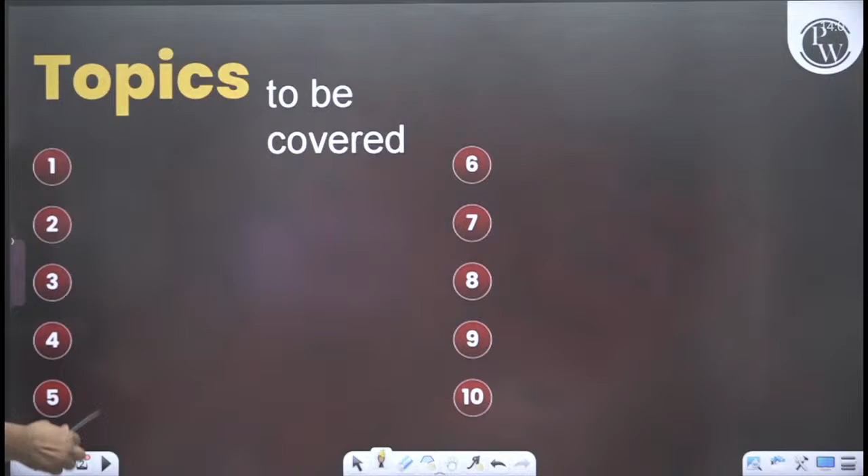In this revision through PYQs, what topics am I going to cover? First will be material science, as usual, because production we have divided between two faculties. First is material science. Then I am going to cover questions on jigs, then metrology, then forming.

I have selected PYQs based on their importance, not all PYQs. Whatever I felt that for GATE 2025, this sort of PYQ the student has to understand thoroughly.

How many hours? I don't know, to be frank with you. Let us say 2.5 hours. Focus on, because my Maha revision will be on the 10th. Again you will ask how many hours - I don't know, it may be 1 hour, 10 hours, or 7 hours. First of all, it's January, not even 1 month is left.

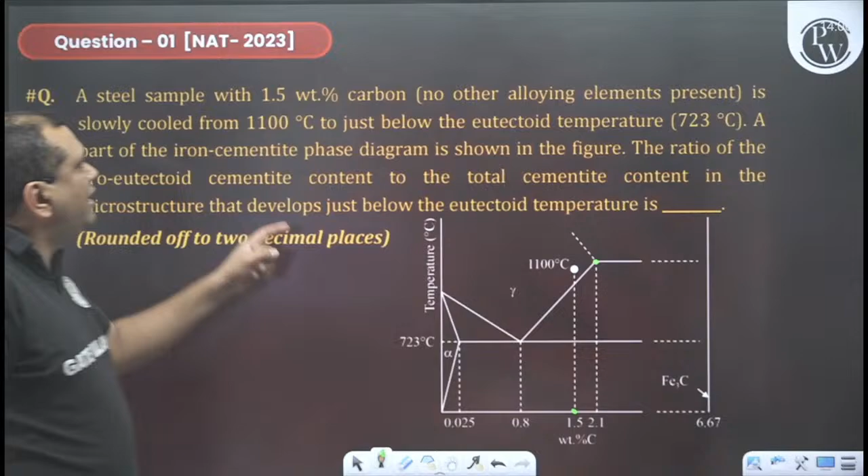A steel sample, this is NAT GATE 2023. A sample with 1.5% carbon - this is the iron carbon phase diagram, everybody knows about it. This is 2.1%, 0.8%, and the sample is having 1.5% carbon with no other alloying elements present. It is slowly cooled from 1100 degrees centigrade to just below the eutectoid temperature, 723 degrees centigrade. It is given that the eutectoid temperature is 723 degrees centigrade. A part of the iron cementite phase diagram is shown in the figure. This diagram is also called iron carbide, or iron carbon, or iron cementite - for one diagram, there are three names.

There are some PYQs here, Ritik Mac, some PYQs of P and I. Okay, the ratio of the pro-eutectoid cementite to the total cementite.

That ratio we need. Now, because we are in the hyper-eutectoid steel range, first tie line I will take it here. This is my fulcrum, this is my first tie line. And if I am taking tie line above 723 degrees centigrade,

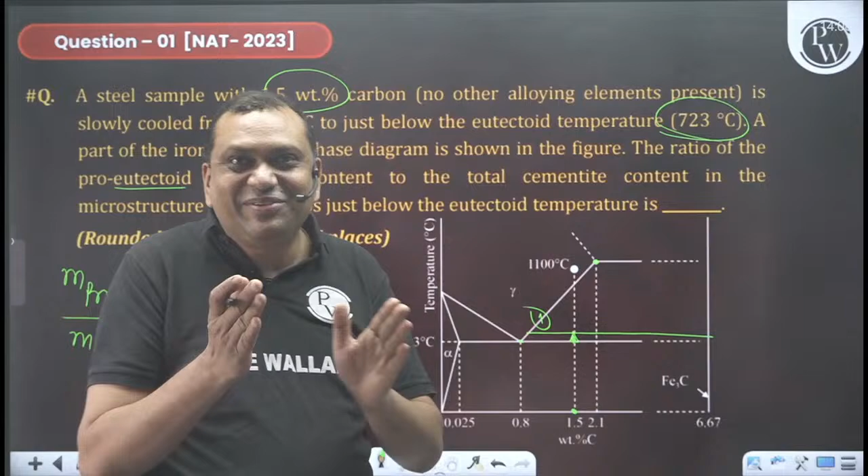I will get pro-eutectoid phase. Remember, pro-eutectoid phase accumulates at the grain boundary.

Brahmanandam, good afternoon. Brahmanandam, as I know, he has already completed 1000 films and he is preparing for GATE now.

Okay, all right. So my tie line one, gamma is this side and this side Fe3C. So what my lever rule says, I take opposite side. So if I want to calculate the mass fraction of pro-cementite, I will take opposite side.

I mean this divided by this. I want to calculate the mass fraction of pro-cementite. Pro means before eutectoid temperature. So opposite, this divided by the whole thing, meaning mass fraction of pro-cementite will be 1.5 minus 0.8 divided by 6.67 minus 0.8. That will be the mass fraction of it.

Yeah, very good. Himanshu Manvit, try to give me the answer. Just a minute, there is some issue in my front chat. Just a minute. Okay, now I'm able to see your chat here clearly.

So this answer comes out to be 0.119.

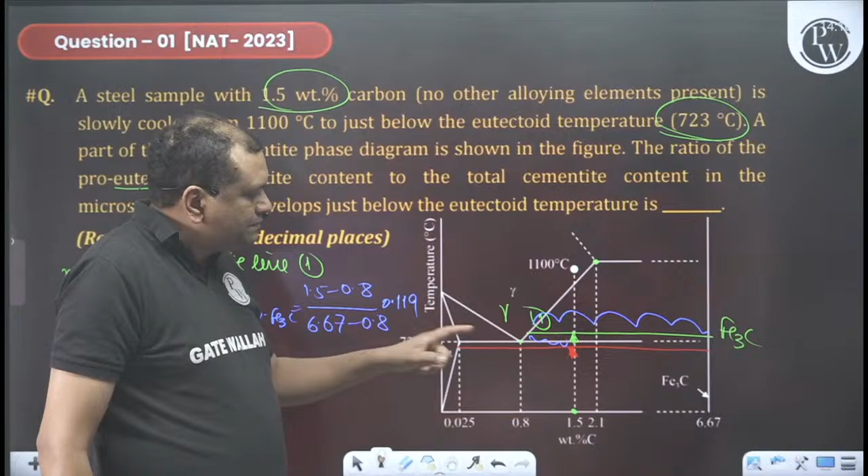So cementite is on this side. So this divided by the whole thing, meaning 1.5 minus 0.025 divided by 6.67 minus 0.025.

My dear students, whatever composition given in the phase diagram you have to take those compositions. This I taught you 0.02, but here it is given 0.025. This is 0.8 clear, this is 2.1, there is no issue.

So this comes out to be 0.220, and the ratio of mass fraction of pro cementite to total cementite means 0.119 divided by 0.220. This will come out to be 0.53.

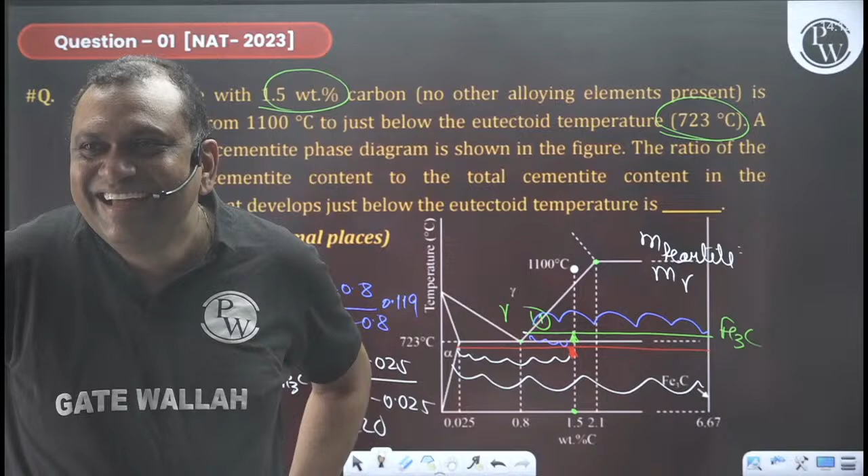Yeah, correct. Acha, Ayan, I know you, Ayan, I know you. This is clear or no?

Bacho, here a new funda to all of you. Everybody's okay. Now see the new funda. Cheers.

We have to understand the Latin little bit. Latin. Okay. So I am saying pro means before, hypo also means before, because sometimes gate people may play some word jugglery, so I'm warning you.

Okay, let us say this is your iron carbon phase diagram. Once again, this diagram is known by 3 names. Okati rendu mudu. First name is iron carbon phase diagram. Second is iron cementite phase diagram. Number 3, iron carbide phase diagram. All 3 are same.

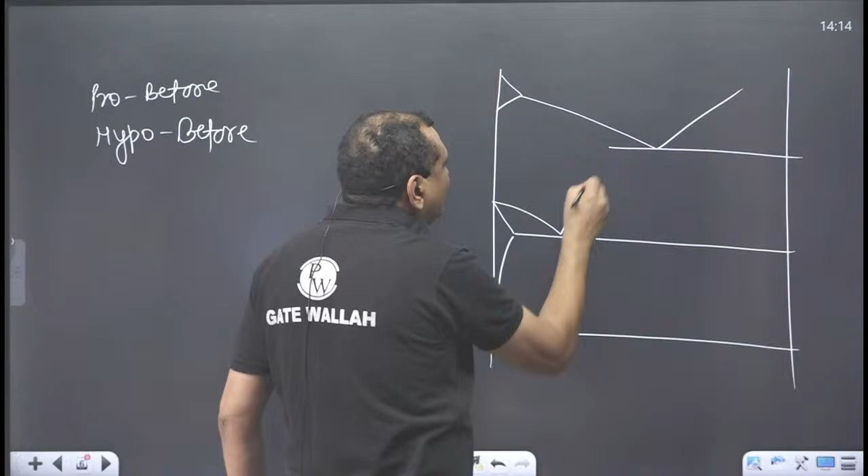Suppose the question is, in an alloy of cast iron, because beyond this point it is cast iron, I am giving you the variation you can expect in GATE. Let us say your cast iron composition is here, let us say 2.4%. This is 4.3%. This is, let us say, 5.2%. Let us say question says that in a sample of cast iron there is 2.4% carbon.

There is a 2.4% carbon. How much is the mass fraction of pro... how much is the mass fraction of, let us say 5.2%. It will be easy to understand. 5.2% carbon. How much is the mass fraction of eutectic cementite?

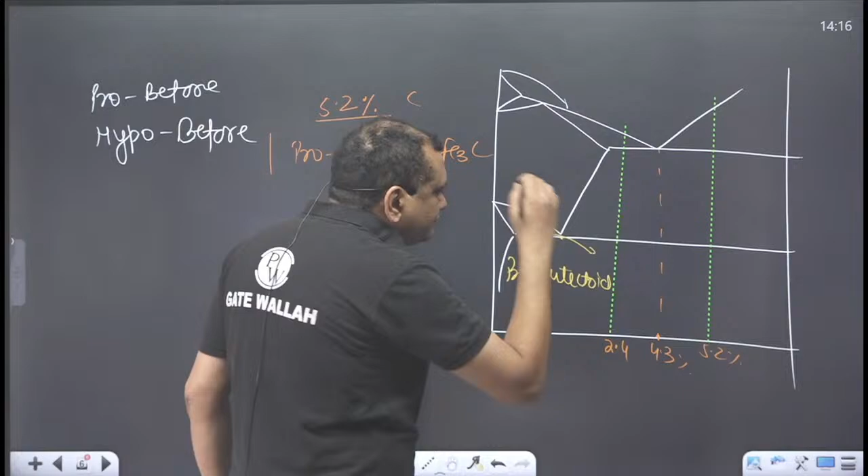See here, around this line, I use the word pro-eutectoid. And around this point, I will be using the word pro-eutectic cast iron, and this is steel.

I hope in GATE you have to have a presence of mind. Your questions are very easy. I'm challenging that if you have studied from PW and I have taught you there, whatever portion, every faculty's questions of GATE are pretty easy. You have to have presence of mind.

Now it says pro-eutectic cementite 5.2%. So take this tie line. Cementite is on this side. So the answer will be 5.2 minus 4.3 divided by 6.67 minus 4.3. That way we will handle it.

You have to have presence of mind. I'm guaranteeing you, I can write it and give it. Whatever we have taught at PW, 90% of questions you will be able to solve. Out of 100, 90 to 95% questions you will be able to hit. And on that you will get a rank.

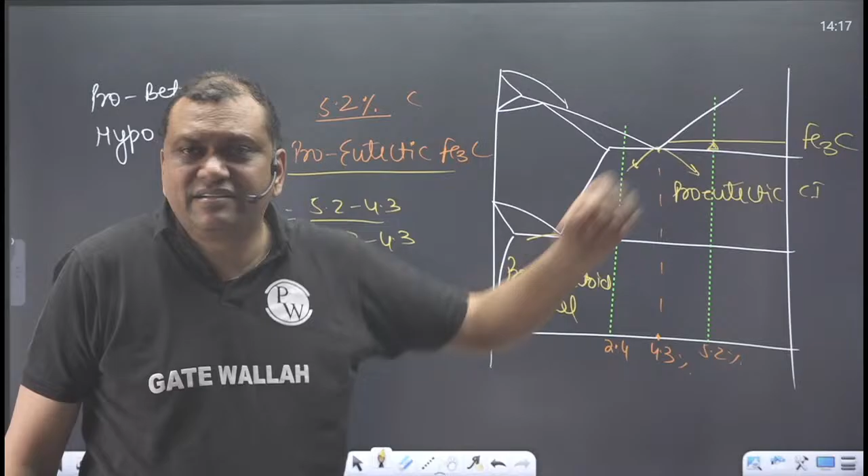You have to have presence of mind. Don't do mistakes. Correct? All right. Next question. Please read the next question.

Read the next question. Where is that? Oh, I was reading the question. It was a very good question, a very good question.

The other portion will be called pro-eutectic. Pro-eutectic austenite, pro-eutectic cementite.

I like this word. I like this word really.

In the iron carbon phase diagram, the eutectoid composition means 0.8. The maximum solubility is given. We know these things very well. 0.5 weight percent of carbon. The temperature is here, percentage carbon is here.

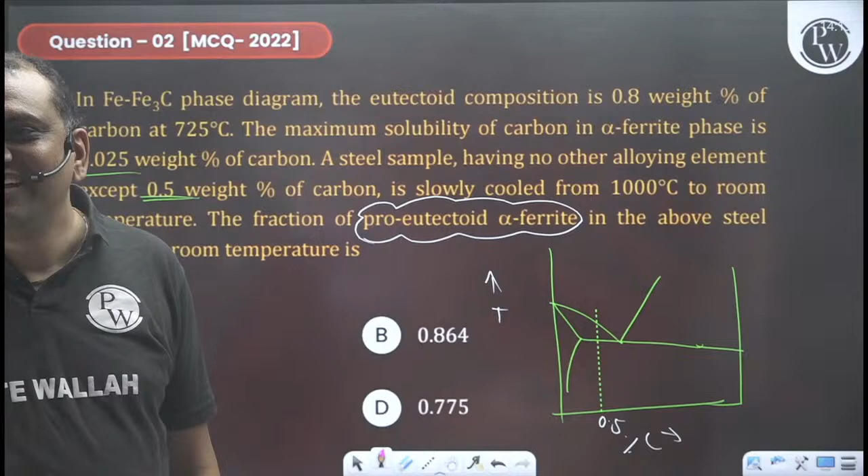I think all of you are really very good. Manvit, Vignesh, Chandru Patla, Shivang Verma, Prinshu Divakar, Ritik Mac. I'm joking with my students. Quite possible there may be some girl student, please don't get offended, I'm not able to recognize by name. Okay, very good, very good.

Verma, you know very well. Okay, very good, very good. Sister's name we should know, we should know the names of sisters. Okay, oh, sorry.

Alpha means this divided by the whole thing: 0.8 minus 0.5 divided by 0.8 minus 0.025, mass fraction of pro alpha.

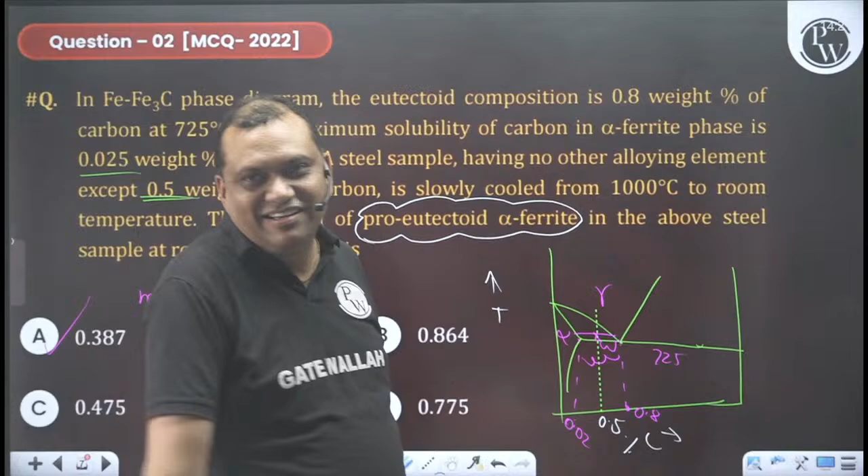Okay, okay, all right. So next Raksha Bandhan, Adarsh Kumar Verma is going. Is that all right, easy? Pretty easy? So Adarsh Verma, you are going? Very good, very good, I'll take the address and go with some gift. Brother gives gift to the sister. It's easy for our students. Very good, very good.

See about this: fluidity of a molten metal alloy during sand casting depends on its solidification range. Everybody knows, because in that zone there will be a range at which liquefaction and solidification takes place.

Okay, very good, very good. The phase diagram of a hypothetical binary alloy of component A and B is shown in the figure. This is 400 degrees centigrade, this is 700 degrees centigrade, this composition is 30%, this composition is 10%. All the lines in this phase diagram, including the solidus and liquidus lines, are straight lines. Why have they given straight lines?

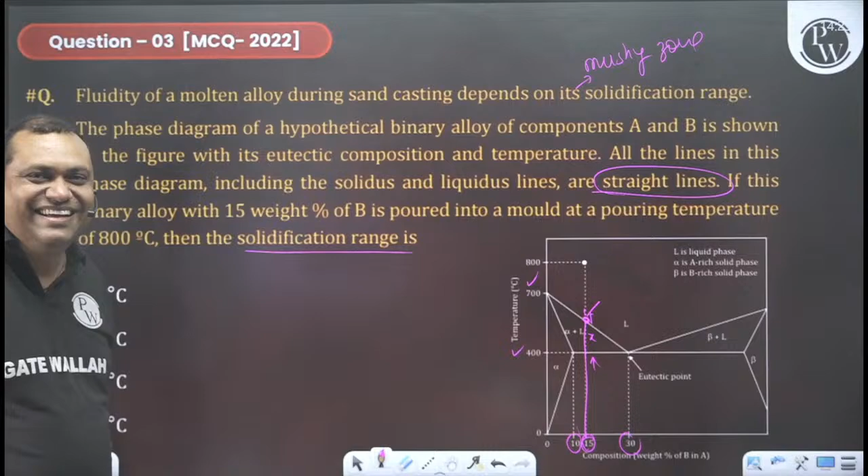So that you can do interpolation. Okay. If this binary alloy with 15 weight percent of B is poured into the mold at a pouring temperature of 800 degrees centigrade, then the solidification range is, what is this range? Some of you already told.

Basically, you can use similarity of triangles. One triangle is this: x divided by 30 minus 15. And the second triangle is this: 700 minus 400 is 300, divided by 30, because this is 30, this is 300.

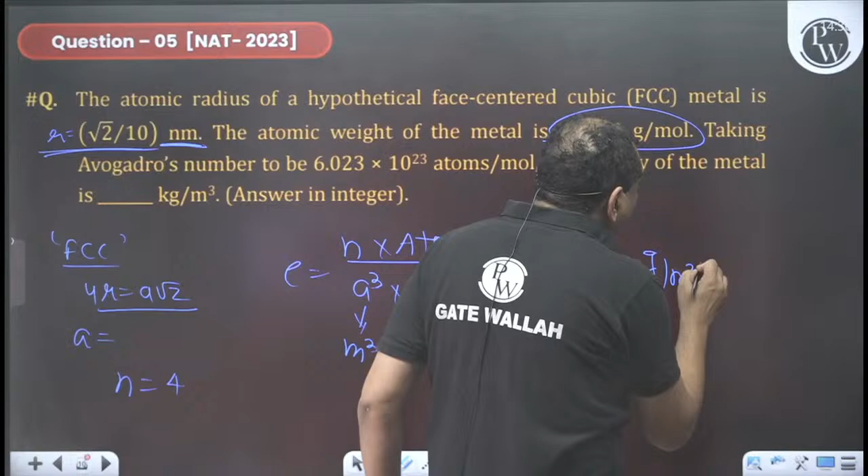Yeah. Yeah, Verma, that's the reason I'm telling you.

Okay, Shibang. Uranium 235 - oh, he's a bomb actually here. Uranium 235 is a bomb. Manvit, Ritvik, you are correct. 2500.

Uranium. Chandru. Aryan. Aryan. Very good, very good, very good. Brahmanandam, 10 is missing. Senior most hero for our gate preparation. Sumit Babu, Ram Ram. Omkar Roja, very good, very good. Dunia wale, very bad, very bad. Lavkush Kumar, very good, very good. Okay, okay. Mahesh, Babu Moshai, very good. R. Pant, Love Kush Kumar. Two people in one name, two people in one person. Love and Kush. Okay.

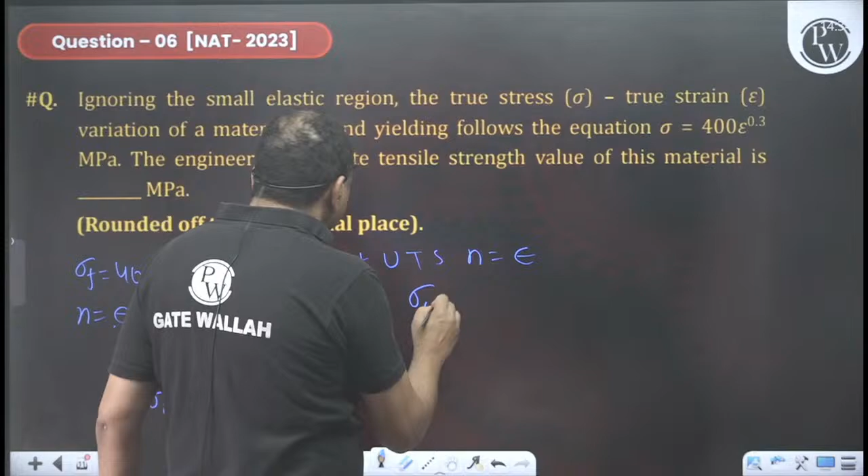So now n is equals to epsilon is equals to 0.3. So now epsilon is ln(e+1). So now 0.3, you take the antilog, you will get the value of e plus 1. And sigma f is equals to sigma naught times (e+1). And at UTS, n is equals to epsilon. So true stress is 400 times 0.3 raised to power 0.3. Correct?

You will get, this is the true stress, in MPa. And then with the true stress value, put it e plus 1 from here, calculate sigma naught. Very good, very good.

Some people are not answering correctly. Some people are not answering correctly.

Yeah, see, I'm talking differential Mahesh and all that. Acha, sorry, Ian, you are answering the true stress. Sigma naught value, yeah.

All of your preparation is really very good. Based on the response that I'm getting from the chat box, all of your preparation is going really very well, going really very well.

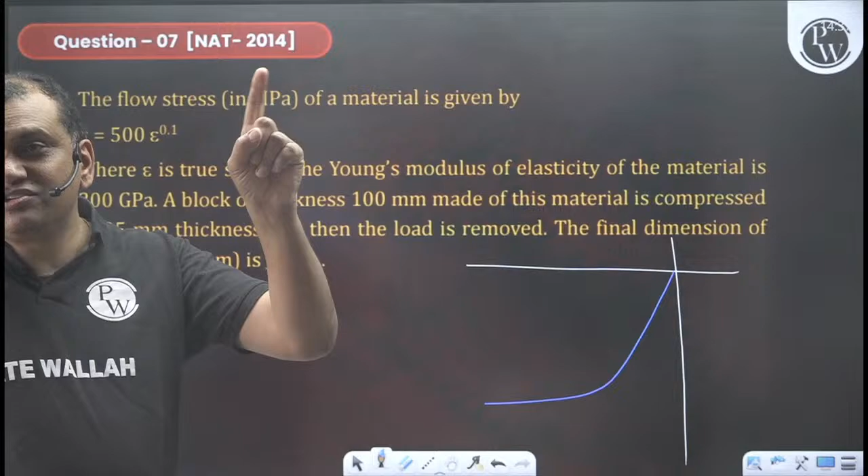Shivang Verma and Ritik Singh, on uranium-235, these answers are not fitting in the range given by IIT. Pant's answer is also not fitting in the range. That is the reason I am telling you, be careful - it is not fitting in the range, you check it. It was a very minor variation. Uranium-235, that answer is also not fitting. You have to be very careful.

Now, everybody should look at their screens for 2 minutes.

Uttari Sahazil, what are you doing? You have broken my heart.

Sahazil, what are you doing? Truth Lover short video. When the YouTube channel name is Truth Lover, it means you don't love truth.

Everybody should look at their screen. Please don't do mistakes here. Please do not do mistakes here. Leave everything, forget about everything, and look at me.

Most of you are answering this, no? Mechanical Rock Star, that answer is not in the range. Omkar Brahmanandam, I said correctly, no? Now it is in the range. No, up to 2 digits, 95.16 is in the range.

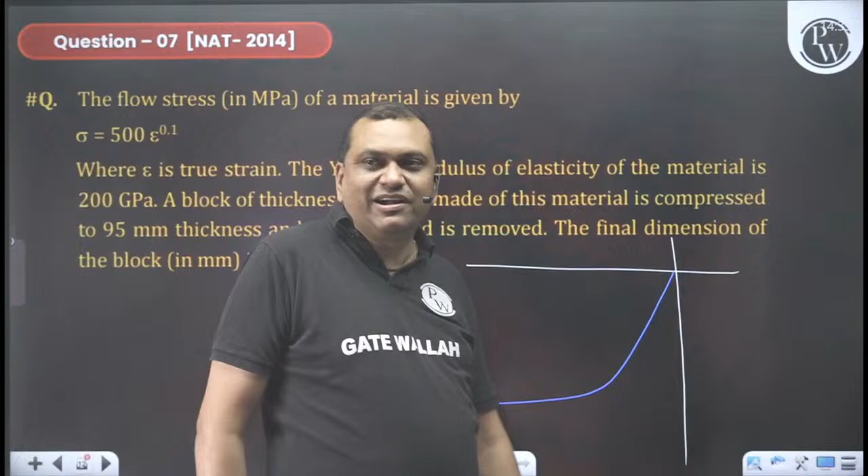See, look at your screen. Look at your screen. So this is the flow curve equation.

Two minutes, just please 2 minutes, everybody, without any deviation. Pant, I think, slightly managed to get in the range, but I don't think it is a correct answer. You see the answer given by IIT, it was a very narrow range, very narrow range.

Look at the screen for 2 minutes. See, there is a workpiece and I am forging it.

I am telling you the principle so that you can apply it in other questions as well. Height is h1, and you are forging it. You are forging it to, let us say, h2.

In this case, h2 is 95 mm. No, others, you are out of range. T Funny Mohan, you are out of range. Sumit Babu, you are in range. Bacho, I think you look at me now actually.

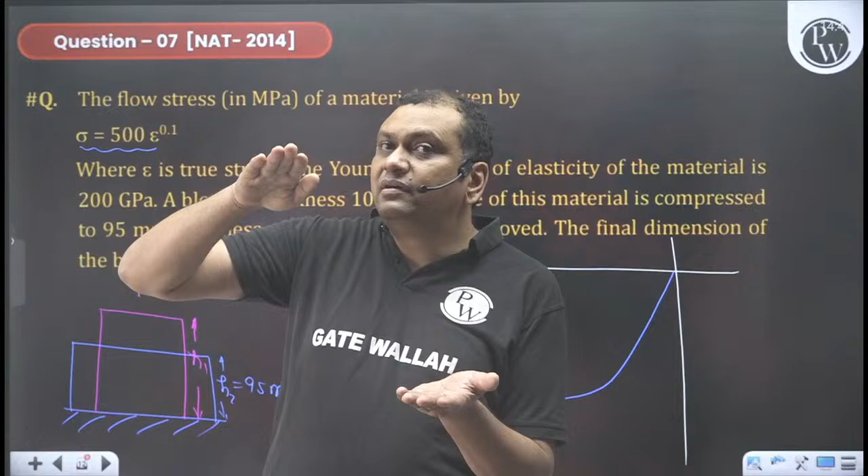Now look at me. The moment the hammer is removed, there will be elastic recovery. So you are applying the compressive load, so the size will slightly increase. Let us say this is delta H. This is delta H.

Suppose you are applying a tensile load. This problem we have done in Super 1500. This problem I have discussed in Super 1500. So my stress strain diagram will be in the first quadrant. So when I am unloading from here, this will be spring back.

So LF will be nothing but L2 minus delta L, because when I am applying the tensile load, the moment I remove the load, it will shrink a little bit. Okay, so here, now because it's a compressive load, the moment I remove the load, it will expand a little bit. That is the reason HF will be nothing but 95 plus delta H. But when there is tension, it will shrink a little bit. That question I have done in Super 1500, but still some of you have forgotten it.

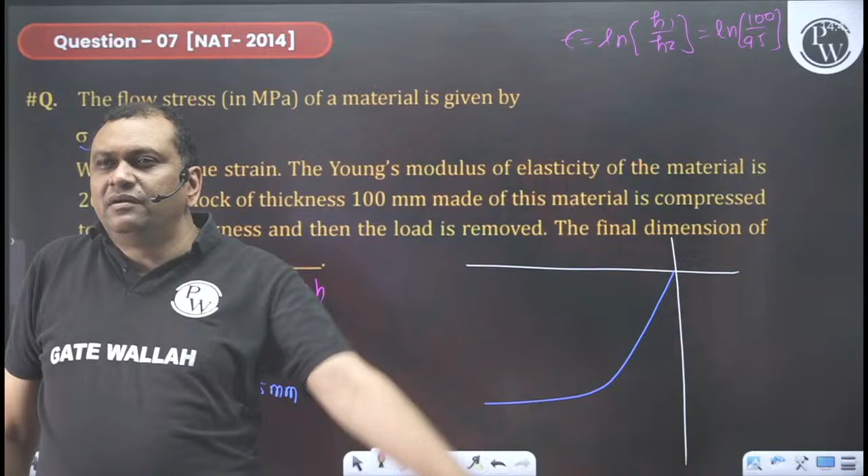Now calculate the strain: ln 100 by 95. Don't do anything, all of you are giving wrong answer. Love Kush Kumar, wrong answer. Funny Mohan, wrong answer. What are you doing, brother?

Mahesh, correct answer. Look at me, I am telling you, look at me. Again, because you are not hearing me, take a deep breath. By this, your head becomes cool.

So now at this point, there is some epsilon. Put the value of epsilon here, you will get sigma F, true stress. You will get the value of true stress. Okay, all right, no? Now, from that point, you are unloading it.

And this is called spring back. Because it's a straight line, I can apply Hooke's law here. See,

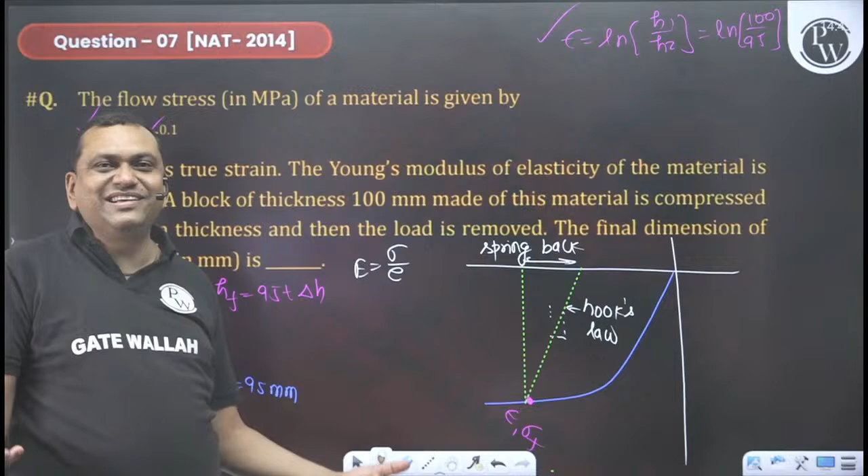What exactly are they doing? Whatever true stress they have calculated from here, they are putting it here. That is wrong. You have calculated true stress, but this is engineering stress. So sigma F is equal to, let us say, sigma 1.

E plus 1. How to calculate this E plus 1? You have got epsilon. From here you calculated epsilon. From that you calculate E plus 1. Put the value of E plus 1, calculate sigma 1. Put the value of sigma 1 here. Because you know E, sigma 1 you calculate from here.

This is a mistake all of you have made. Whatever true stress came out, you directly put it here. That is the reason your answer is not coming in the range. You see the IIT range, it is very, very narrow. Your answers will be wrong. It will not fit in that range.

So now this is not it. E is nothing but dH by 95, because this is the second elastic recovery, dH by 95. E you will get from here, E1. Calculate delta H, and HF is nothing but 95 plus delta H. And the answer comes out to be HF equals 95.167.

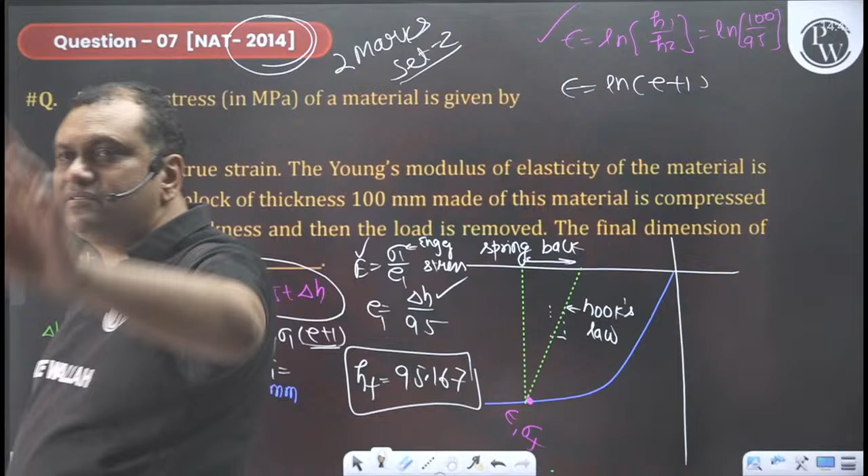Okay, I will repeat Manish Singh's. I will definitely repeat. Oh, NM Anurudh, I will definitely repeat, don't worry.

Let's do cheers first. Cheers with water. Cheers.

Such type of questions may appear this year also. See, once again, take a deep breath. When you are taking a deep breath, incoming air should go to your lungs, not your stomach, and then exhale gently. Cheers for water.

If you are applying the compressive load... no, it's not at all tough. Sumit Babu, no, it's not tough. Nothing is tough — if you know the funda, everything is easy.

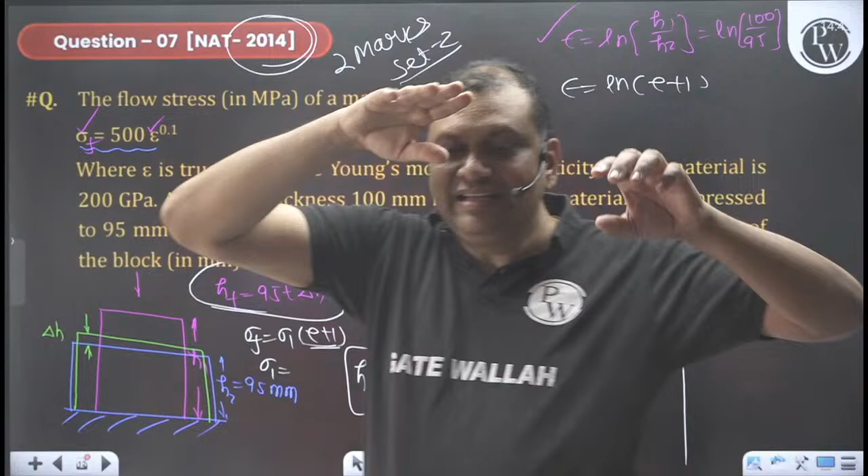If you are applying the compressive load, the moment you remove the load, size will increase because of elastic recovery. And if you are applying the tensile load, the moment you remove the load, it will shrink because of elastic recovery. So now, final length HF after elastic recovery is this. So HF will be 95 plus delta H. Delta H is the elastic recovery.

Okay, oh sorry, we have to speak everything in English here. Angrez — because it's a forging operation.

We calculate the true strain ln(H1/H2), that is ln(100/95). And epsilon is nothing but ln(e+1). So we know epsilon; take the antilog, so you will get the value of e+1. And we know epsilon — put the value of epsilon here, you will get the true stress. Means, what is the true stress at this point?

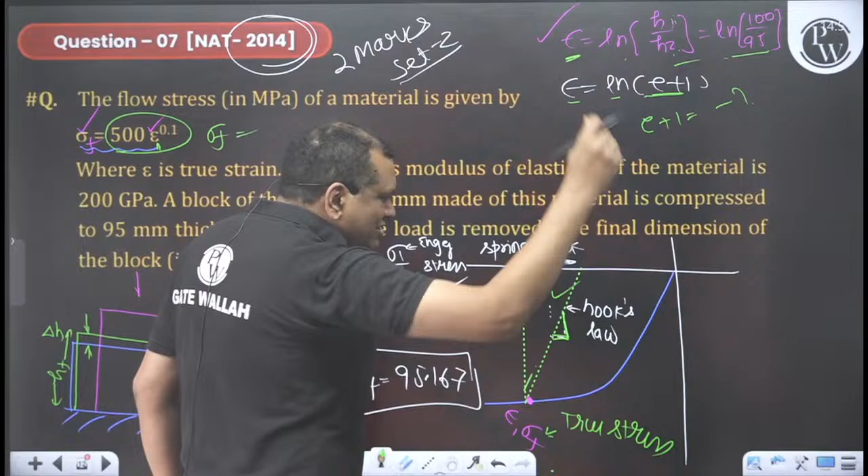Okay, now from this point I am unloading the specimen, and this is called elastic recovery. Because this is a straight line, we can apply Hooke's law here. Hooke's law means Young's modulus equals engineering stress divided by engineering strain.

The mistake most students make here is they put this true stress here — that is wrong. Hooke's law uses engineering stress, not true stress. You have got true stress; how to calculate engineering stress? Using this formula, which you know, you have to find this out. e+1 is here.

So you calculate the engineering stress. Now you know the engineering stress, and you know Young's modulus — it is given as 200, something like 200 GPa. You calculate e1. What is e1? This e1 is the engineering strain during elastic recovery. This e1 will be nothing but delta H by 95. So once we get the delta H value, we can find HF.

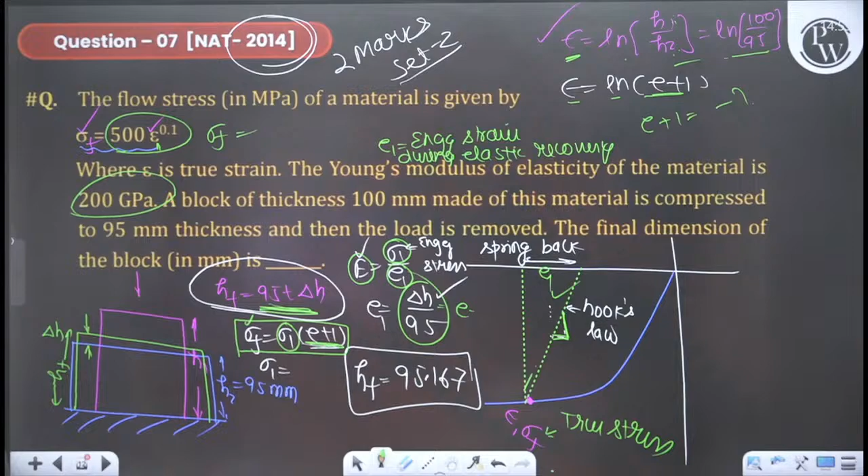Very good, Aryan. He has been trying basically for 3 months. Now the answer is matching. Once again, for such problems you have to be a little careful. Don't make mistakes — our entire year of preparation will go waste. Don't make mistakes; that's the reason to do a little pranayama, it will cool your mind. Very good, very good, very good.

What about this? On the Telegram channel, one student was asking, sir, when will I use this formula, because the K value is given? When will I use this formula? I have given the answer: when this formula is given in the problem, I will use it; otherwise I will not use it — I will use the slab method.

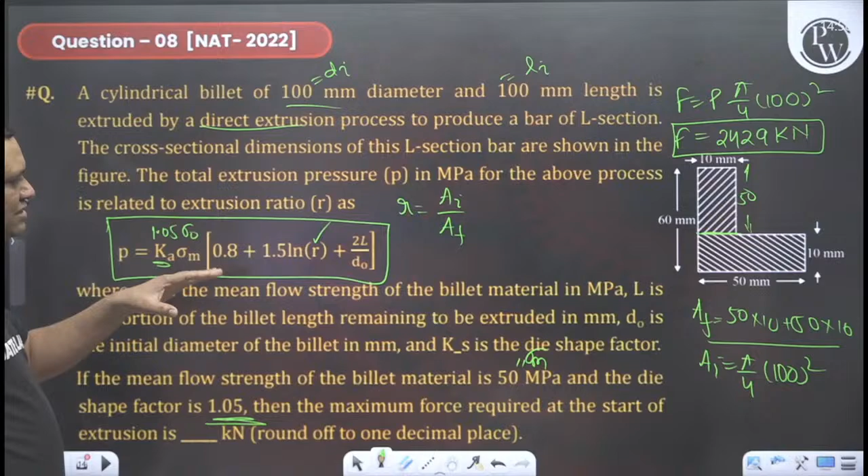Once again, responding to whatever a student was asking in the Telegram channel: if this formula is given, only then will I use it in the question. Otherwise, I will use the slab method.

Very good, Shahazil, Manmit, Mechanical Rock Star Samet, Adarsh, Saurabh, Chandru, Fani Mohan. What about others? They are showing only the show. What about others? Philophobic - this is a channel name, I think, eh?

Okay, good. GATE 2022. See this one.

Yeah, you are correct, Chandru. That is the reason I am discussing. Acha, random, I see. Ritik Mac, okay, very good. It's a rolling.

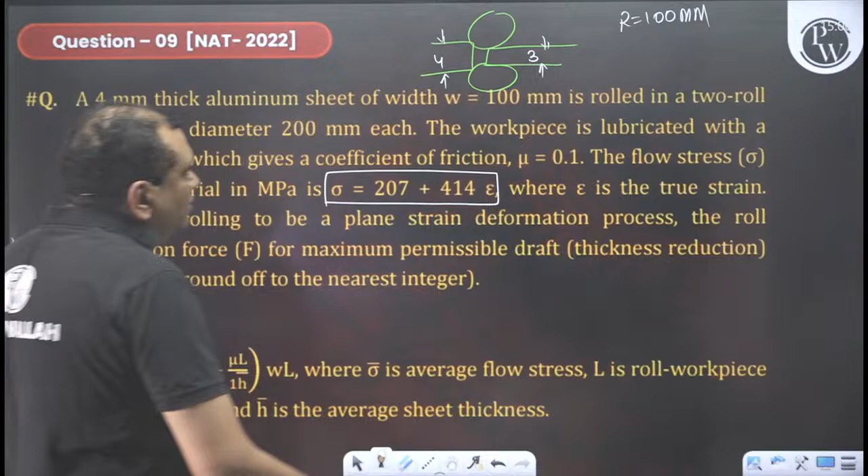Read the problem. Delta H is equals to mu square R. Mu is 0.1 square into 100. That's how we get it.

From here we will get H2 is equals to 3. Okay? We have to find out the force.

So sigma bar is nothing but 1 by epsilon 1 integral from 0 to epsilon 1 of sigma f d epsilon. That's what I told you to apply, this logic. And this epsilon 1 is nothing but ln of 4 divided by 3, initial divided by final. So this is epsilon 1, sigma f is here. So I will give you this answer.

0.287. So 1 by 0.287 integral from 0 to 0.287 of 207 plus 414 epsilon d epsilon. You will get sigma bar. Mu you know, L you know.

H bar is the average sheet thickness. 4 plus 3 divided by 2 is 3.5. You know mu, you know L, you know everything. Calculate F. Everything is given now.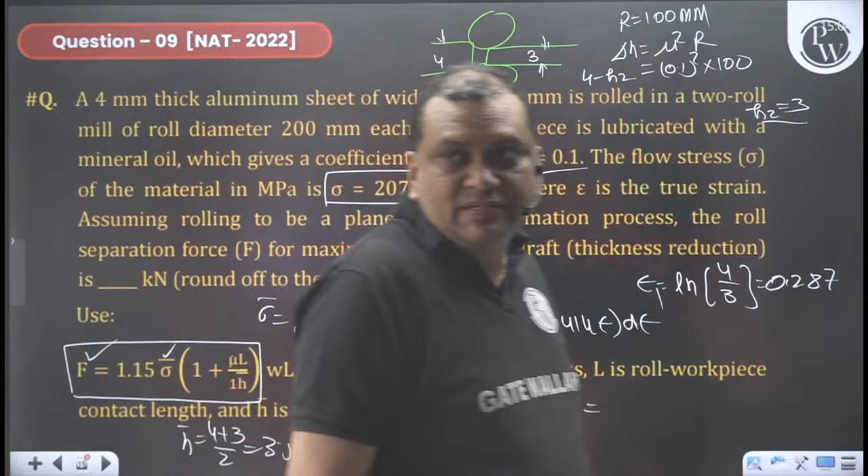Okay, good response, good response. Very good, very good.

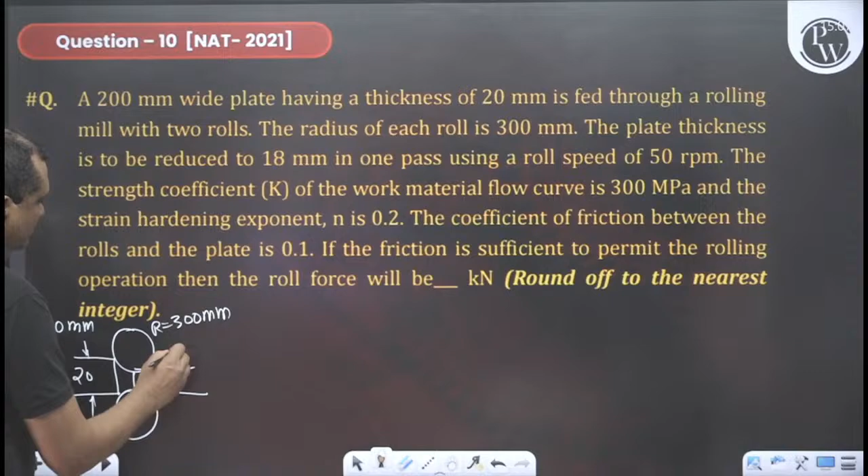A 200 millimeter wide plate having a thickness is fed through the rolling mill with two rolls. The radius of each roll is 300 mm. The plate thickness is to be reduced to 18 mm. Make the diagram, it will simplify the things. And the roll speed is 50 rpm.

The strength coefficient, the flow curve equation is given as 300 epsilon raised to power 0.2. Mu is 0.1. If the friction is sufficient to permit the rolling operation, then the roll force will be.

So F is nothing but sigma naught, W into L. T is nothing but F into L by 2. And power is nothing but 2T into omega for two rolls. Okay. L is equals to under root of R delta H.

And the sigma naught, R is given to you as 300, delta H is 2, R is given to you. So for calculating sigma naught, it is nothing but K epsilon raised to power n over n plus 1, and epsilon is nothing but ln of 20 by 18. You get epsilon, you know all these things. Sigma naught, W is given, L you can calculate from here, calculate the power.

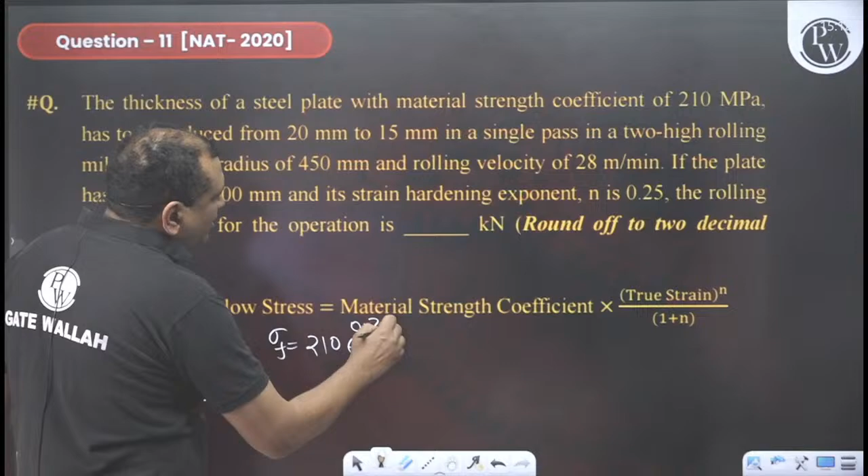Two students' response I can see in the chat box.

Okay, good. Verma, you made a mistake, I think, somewhere.

1167 kilonewton. Previously, you made a mistake.

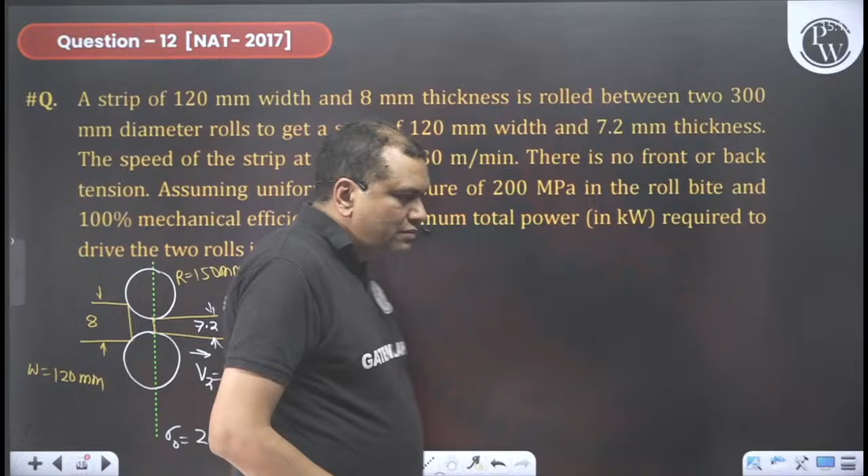No, Shahazil, no, that is not correct. So the problem is omega is 2 pi n by 60, and this n is RPM of rolls, RPM of roll. And the roll RPM was not given to you. So here you make an assumption.

Everybody should look at the board. Our neutral plane is exactly in the middle.

So V2 is known. Can I calculate V1 by continuity equation? V1 A1 equals V2 A2, continuity equation. So V1 into 8 into W1, and V2 is given as 30 meters per minute into 7.2 into W2. W1 equals W2. Calculate V1, you know V1 and V2.

So neutral plane velocity, let us say V1 plus V2 by 2. Here we have to make an assumption that neutral plane is exactly in the middle.

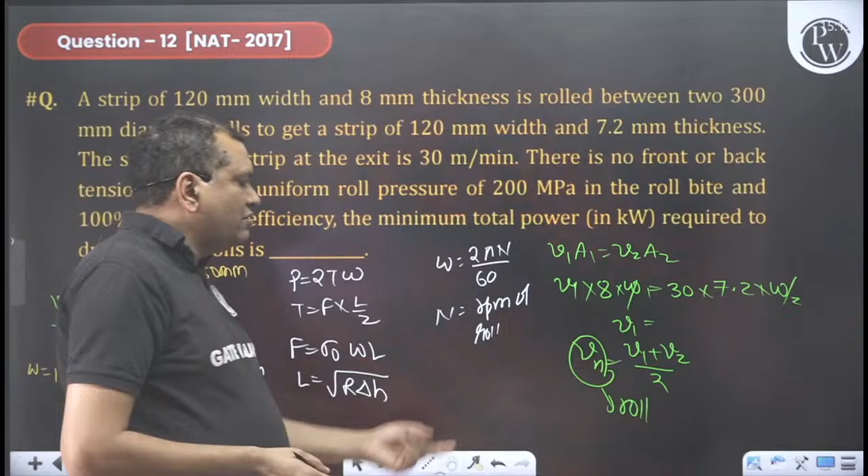So once you go, roll velocity is nothing but pi dn, and you put it here, you will get omega. Find out power.

No, Shahazil, no, that is not the answer. Shahazil, that is not the answer.

Yeah, uranium, you are correct. Because there are 2 rolls, so we are multiplying by 2. T into omega is power consumed by 1 roll only. We are multiplying by 2 because there are 2 rolls.

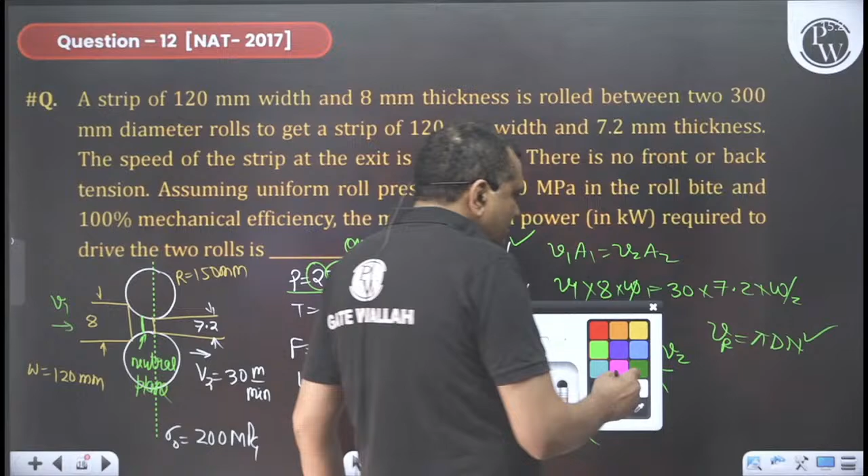Okay? Please remember the concept of this continuity equation. Continuity equation. Please remember this concept of continuity equation. Very, very important.

A range was, I think, less than 9.4, if I recall, if I can recall, something less than 9.4.

Now, one minute questions. These are very short questions. Answer should come out in 1 minute.

Remember that in punching, punch is exact. Clearance is provided over the die and shear will be over the punch. In the blanking operation, die is exact, clearance is over the punch. Punch will always be smaller than the die.

What Prabhu is telling? Sir, roll pressure means mean flow stress. Aryan, suppose this is the roll, okay?

If we see the friction hill, it will be like this. Friction hill will be like this. So in the rolling operation, we are making a lot of assumptions. Let us say this friction doesn't exist. Sigma naught, this is L. W is perpendicular to the plane of this board. So force becomes sigma naught WL. That's how it is, Prabhu is asking.

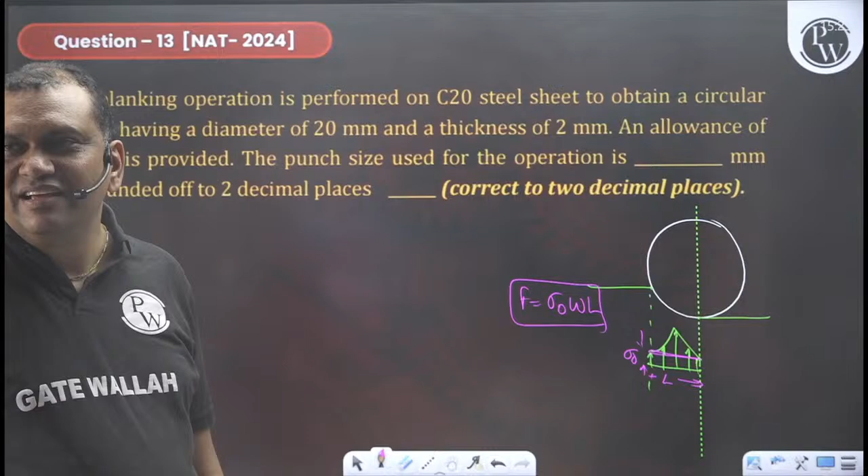Hey, hello, Evan D, Anand Shah, and Ritik Mac, what are you doing? And Rockstar, Mahesh, Babu Mosha, what are you doing?

Take a deep breath, hear what I am saying. Punching, punch is exact, clearance is over the die.

Reverse it. In blanking, die is exact, clearance is over the punch. Punch will be smaller than the die. Only then will the punch go inside the die, na? Punch should be smaller than the die, only then the punch will go inside the die. So now it's a blanking operation, so die will be 20 mm.

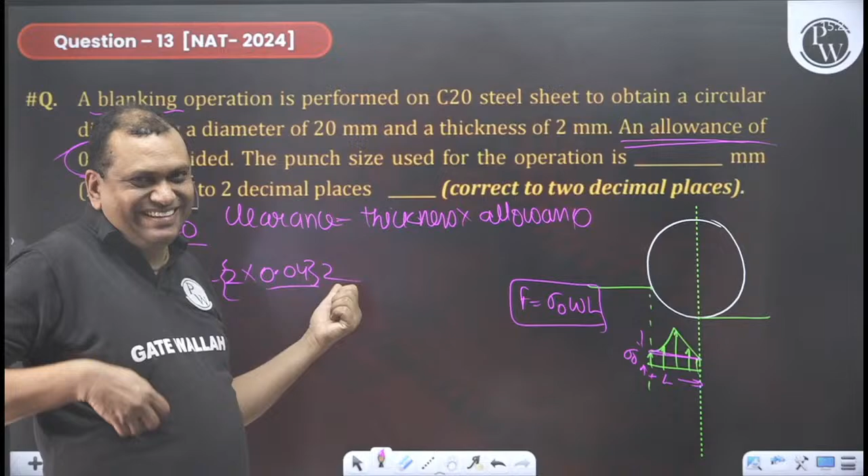So punch will be, now here, 20 minus 2 times. So what I told you, the allowance doesn't have any unit. It means 2 times clearance will be 2 times of this allowance, because it is not given whether it's a clearance allowance or diametral allowance. This allowance doesn't have any unit here. It means clearance will be thickness multiplied by allowance multiplied by 2. If it is a diametral allowance, I will not multiply it by 2. If it is a radial allowance, I will multiply it by 2. Correct? So that way you should do this.

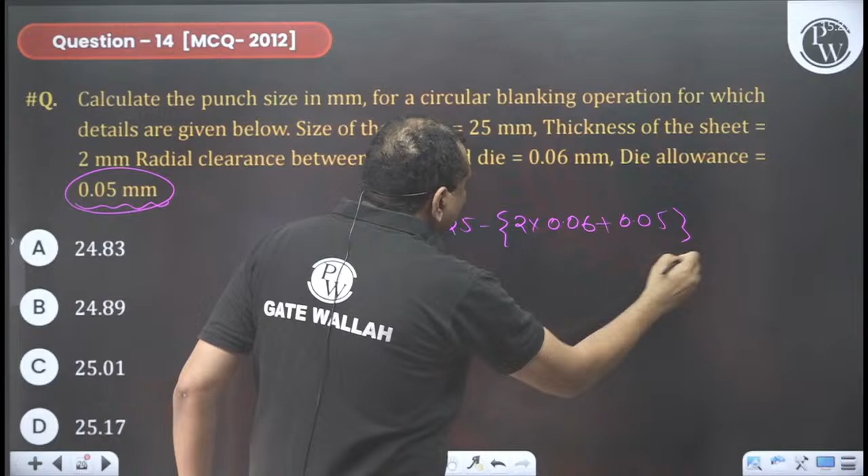So here allowance is having a unit. See, allowance is having a unit. So this we will add up in clearance. So here punch will be 25 minus radial clearance, given as 2 times 0.06, and here we will add allowance. So if the allowance is having a unit, I will operate like this. If the allowance is not having any unit, I will operate the way I did in the last problem. Everybody's okay? Once again I am repeating: if the allowance is having a unit, Anand Saab, you are doing a mistake. Anand, you are doing a mistake. Once again I am repeating, everybody should hear. If the allowance is having some unit, I will operate like this, I will add it along with the clearance. If the allowance is not having any unit, I will calculate the clearance by multiplying that allowance by 2 by sheet thickness.

Can you tell me in the chat box whether everybody is okay with that? Asif, Asit, Ankush, Sonsale - what are you doing? Giving the wrong answers. Everybody is okay? Yeah, very good. Please don't make mistakes here.

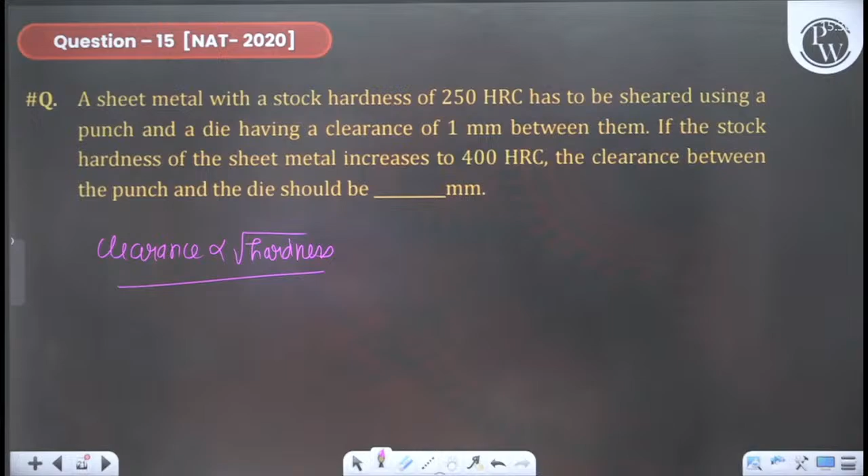Clearance is proportional to under root hardness. Clearance is proportional to under root hardness. Good, good, good, good.

Give me the answer of this. I hope you will give me the answer very quickly, within 1 minute. You will give me the answer of this question in 1 minute.

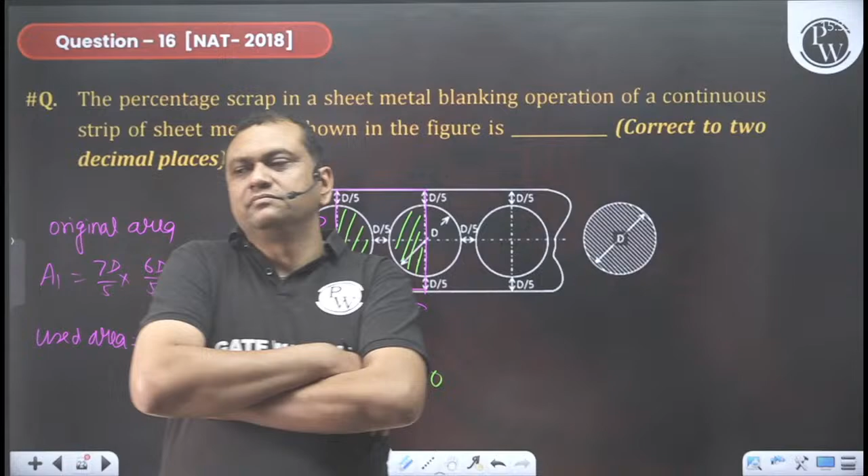Yeah, 53.25%. 53.25%. 53.25%. Good, very good, very good.

Can you give me the answer of this?

Process capability index means upper specification minus lower specification divided by 6 sigma. So here upper specification limit is 15.02, lower specification limit is 14.98. Standard deviation is this. See, answer is B.

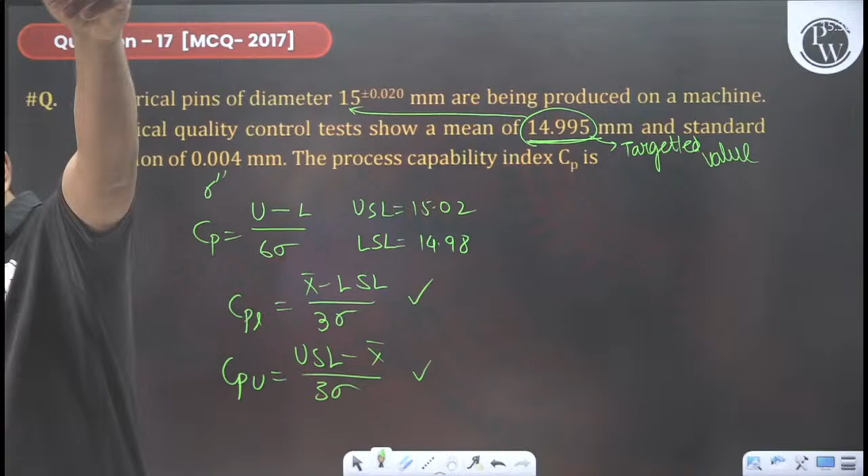You can say like this. Pandey ji, jhamajham. Very good.

What is it? There is something called process and something called specification.

What I will do now, in Maha revision, I will go little detail into it, because if we are doing PYQ, in Maha revision, we will have more time, 7 or 8 hours we will have. So for these boys, God is great. Who was asking actually? Yeah, uranium, yeah.

See, process means our machine. A specification is given by the consumer. This is given by consumer, and this is for machine. These are two different things. Correct?

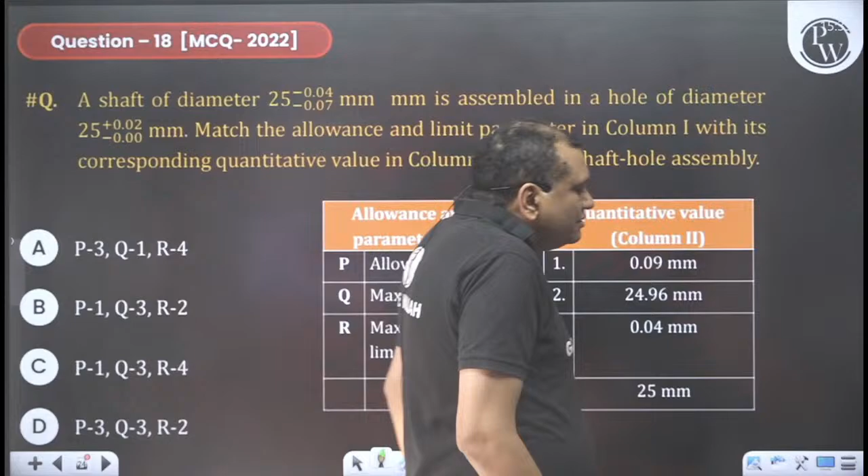Those who are having confusion in metrology, definitely they should attend revision classes. And in metrology, what I told you, you make the fit diagram. Before attempting any question, make the fit diagram.

Putrajaya and Rishabh Datta, Maha revision, definitely you should present. I will go little detail. Related to GATE 2025, I will go in detail. Don't worry, be happy.

And by the way, you may not know the details. I think it is around 2 hours drive from Kuala Lumpur, Putrajaya. And only Muslims are allowed to stay there, because liquor cannot be sold there. There are some rules and regulations for Putrajaya. Non-Muslims are not allowed, that's what my host told me, because liquor is banned. If somebody is found drinking liquor in that capital, he will be jailed. Anyway.

Okay. So 25 is the basic size. This is the shaft, and this is the hole. So this is the hole, 0.02, and this is shaft, 0.04 and 0.03. Correct? This is called fit diagram.

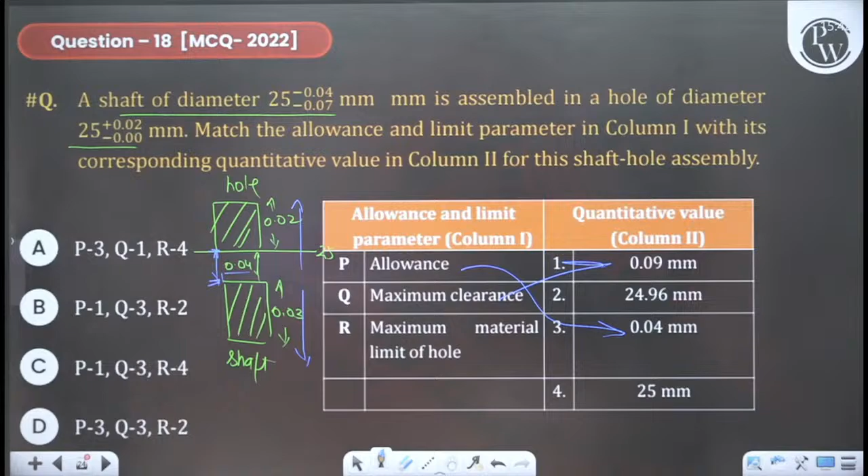Very strict discipline. So now, different color. This is the maximum material limit of shaft, maximum material limit of hole. So the allowance is 0.04. This is the allowance. Maximum clearance is this, 0.07 plus 0.02. Maximum material limit of hole is 25. Correct? So R4 Q1 P3.

Correct? Akash Khotar Rathi, and elimination we can do it. But such problems, always draw fit diagram. This is called fit diagram. While solving limits, fits and tolerance questions, always draw fit diagram. Okay, very good, very good, very good. This one.

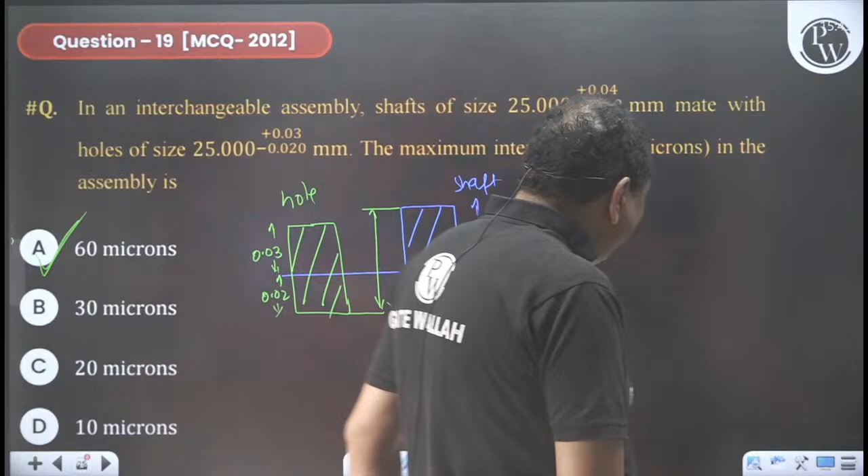Sharma, what is the full name? Sharma, I think you are our student. Sharma, what is the name? Correct? Ayyo, Sharma.

This one. Everybody will use their head. What is the answer? You don't have to solve this problem. Just see the option and you will get the answer. Don't solve this, don't solve this. Arey Tushar, what you are doing? Use your brain, use your brain.

Every year, 2-3 such problems will appear in GATE. You don't have to solve them fully. Just by looking at the options, you will hit the correct answer.

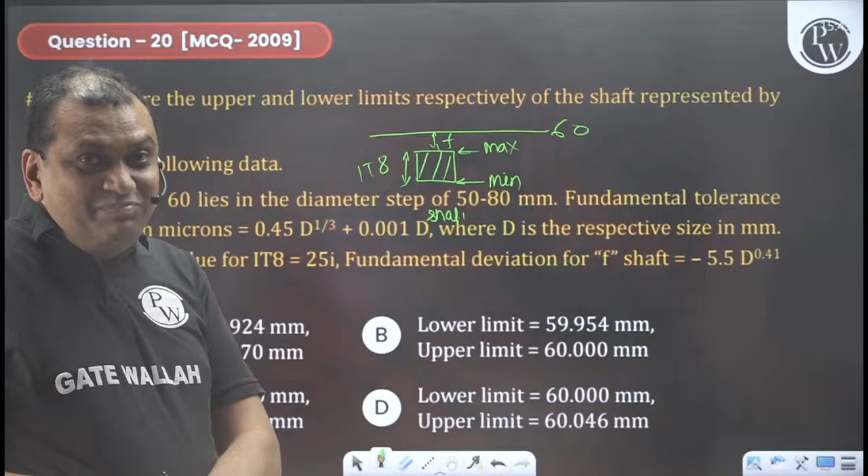Thanks, Rishabh Datta. But now it's time to crack GATE with a very good rank. Then both of our efforts will be successful - my effort and your effort will be successful if you get good marks in GATE. Okay? Please remember the trick, you can apply it in all subjects. In GATE, if it appears that the calculation is long, you see the options - by the process of elimination, you will arrive at the answer. Okay, very good, very good.

I am expecting one similar question like this. This is 25 plus 0.01 plus 0.02 and it is electroplated. This is millimeter, na? 2 plus minus 0.005. So this side also will be 2 plus minus 0.005, because the overall diameter is a sink, this overall diameter will be a sink. So convert this also into equally bilateral because it will be easy for us.

25, 0.01 and 0.01. So shift it. Basic size, this is 0.015 and this will be 0.005. So 25, 0.015 plus minus 0.005, correct na? So the overall D, what is the basic size? Basic size is this plus this plus this, 29.015, and the tolerance is 0.005 plus 0.005 plus 0.005 means 0.015. So D is nothing but 29.015 plus minus 0.015.

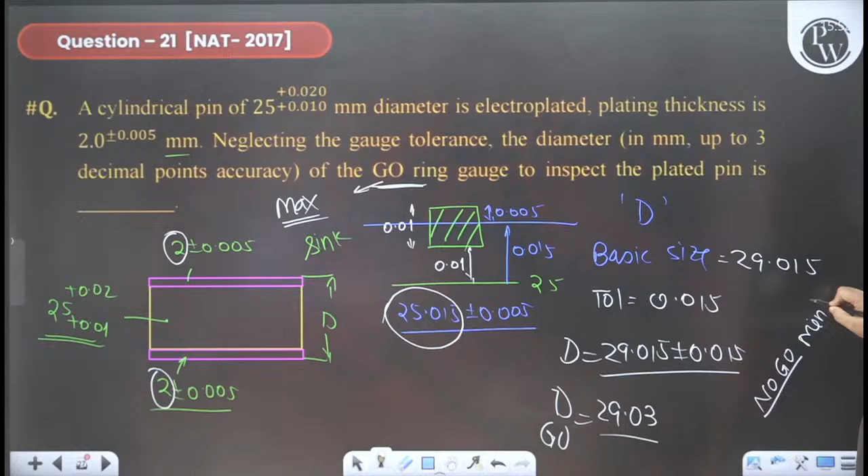Now you have to find out the GO gauge, and GO gauge is the maximum material limit, and the maximum material limit - GO gauge will be 29.03. Yeah very good, all of you are doing good. No, Sayyid, Rafi, Saeed - that will be the no-go gauge. Go gauge, and the no-go gauge will be the minimum material limit, and that will be 29. Don't do mistakes here, I am expecting one question on this.

Okay, everybody's okay? Everybody. I hope everybody's okay.

There was a demand from a student. So one question I did in Super 1500, and the same question I'm doing it here now, this one. It's a huge demand from students because it's very confusing. This question appeared in PI, GATE PI. It's a PYQ of PI. So there should not be any confusion on this.

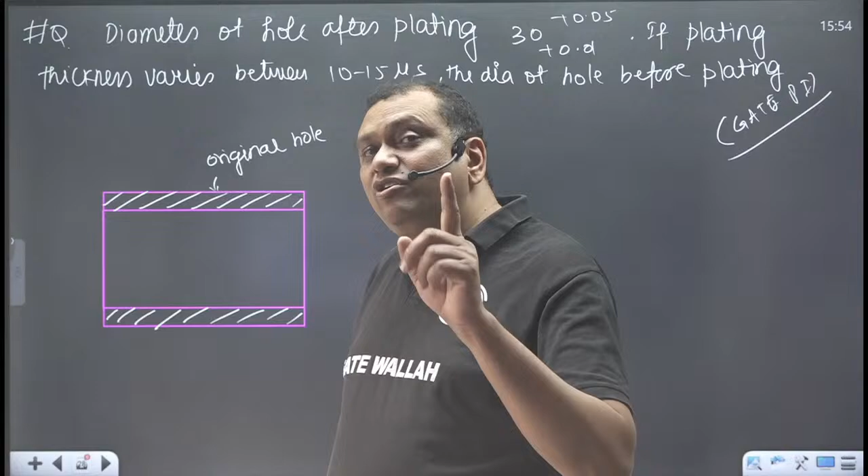So the question is, there is a hole. This is your original hole. Now, here I am doing electroplating from inside. This is electroplating.

After electroplating, this D1, D is 30 plus 0.01 plus 0.05. Yeah Mishra, you are correct. And plating thickness varies between 10 to 15 microns, so 10 to 15 microns here and 10 to 15 microns here. These are microns, and this is millimeter.

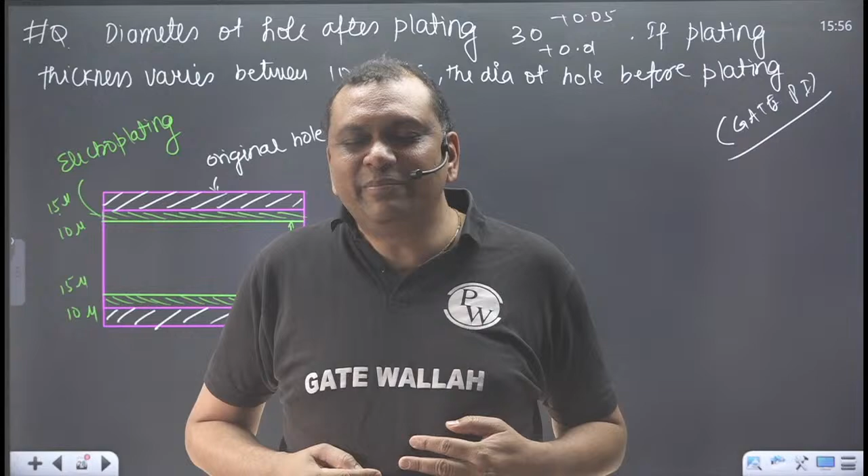So you have to find out the tolerance. No, Ashok, others, no. No. You do one thing - take a deep breath, this method actually works. I'm telling you, all of you, na, take a deep breath. This method actually works, you try.

This problem can be solved by two methods. This is the sink, na? This is the sink. You do one thing - for 1 minute, please don't do anything, only look at your screen. Don't do anything, only look at your screen. Please don't do anything. This is the sink.

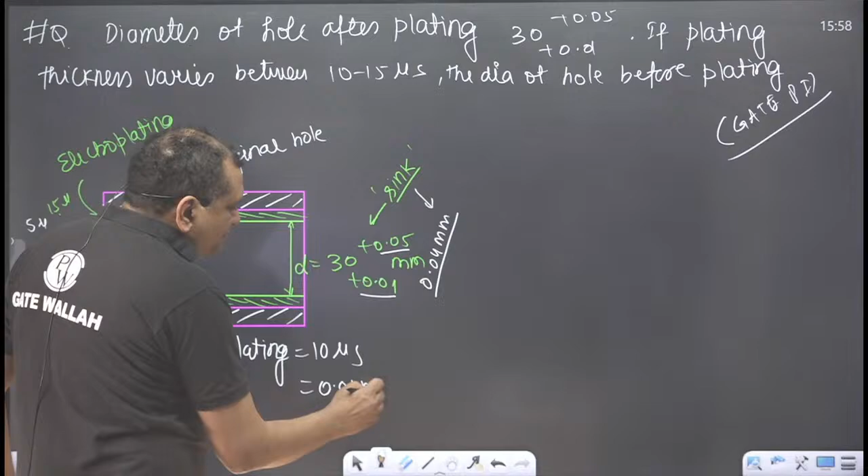Width of tolerance zone of sink is 0.05 minus 0.01, that is 0.04 mm is the width of tolerance of sink. Now plating, this variation is 5 microns, this variation is 5 microns. So total tolerance of plating is 10 microns, na? 5 this side, 5 this side, meaning 0.01 mm. Width of tolerance of sink is 0.04 mm.

Plating is 0.01 mm. So original hole will have tolerance of 0.04 minus 0.01, 0.03 mm, because tolerance always adds up. Tolerance always adds up. And fortunately, there was only one option where width of tolerance zone was 0.03. So hit it, that is the correct answer.

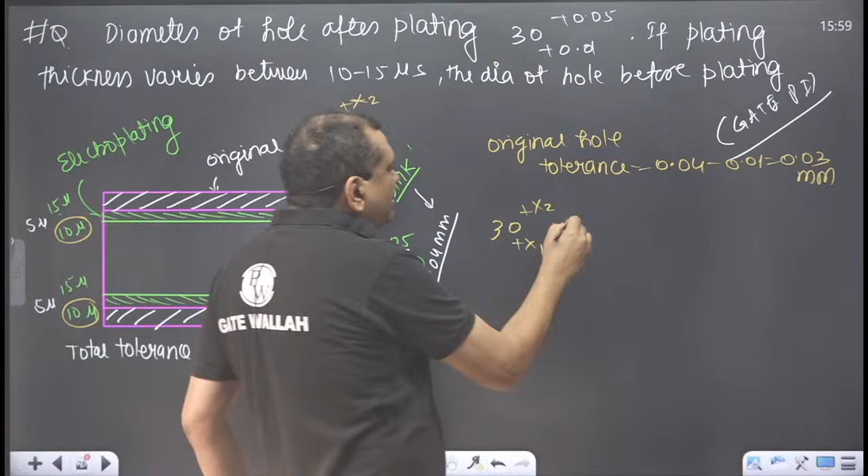Okay na? All right. But let us say this original hole is 30 plus x1 plus x2. Let us say these are the limits of original hole, x1, x2 are the limits. Now, the lower limit of plating will be 10 plus 10, 20 microns, so minus 0.02 - 20 microns means 0.02 millimeter. And what is the upper limit? 15 plus 15, 30 microns.

Should be equal to 30 plus 0.01 plus 0.05. Take this negative term to the right hand side: 30 plus x1 plus x2 equals 30 plus 0.01 plus 0.05 plus 0.03 plus 0.02. Now do the same way, using cross addition as I taught you. 30, 0.05 plus 0.02 means 0.07. 0.03 plus 0.01 is 0.04. That was the exact answer. So width of tolerance zone is 0.03 only.

This question I have discussed here also based on popular demand. In Super 1500 also I have taken up this question.

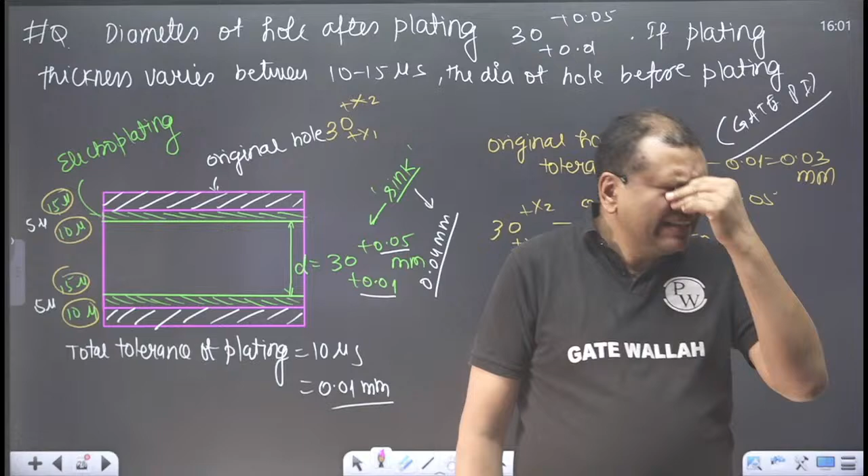Always remember that thing I taught in class: the width of tolerance zone will be much bigger than the individual part, because tolerance always adds up. Tolerance always adds up. This was a little tricky question. Many students got confused because of that.

Dear students, these Abhyas questions, not 20 questions of Abhyas, are brand new questions, and some are very difficult. So let us see - first I will revise the whole subject for 8 hours, whatever I have taught, and after that, next day I will ask you how much you remember. And of those 20 questions, if you are able to hit even 10 correctly, I will be very, very happy. I want to strengthen your fundamentals at the last moment. That's it.

Okay, what about this? Give me the answer in the chat box. This question is there in the workbook also, and in Super 1500 also I have discussed it. Workbook also has it. Please let me know.

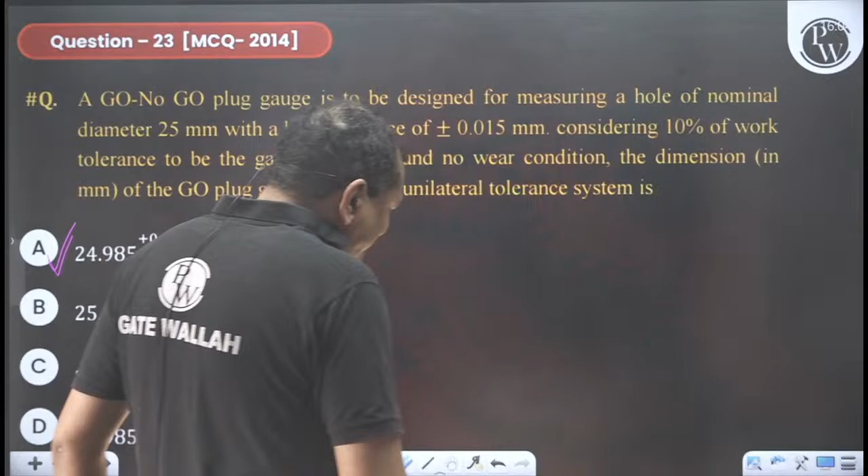So in GATE, they try to make this a very, very complex way, but it's very, very easy. It's very, very easy.

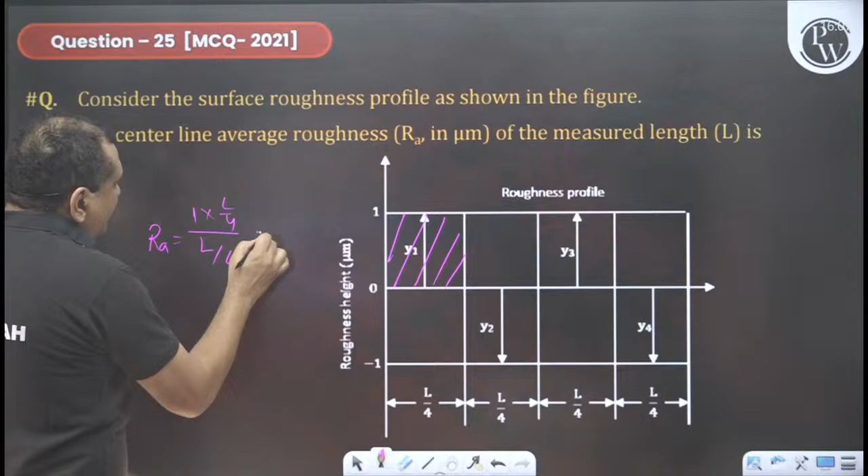So take this area. CLA value is nothing but what is the area? 1 into L by 4, divided by L by 4, is 1. Because although it is coming down, it will also be considered as positive. It will always be considered as positive here also.

Yeah, very good, I have remembered. Once again, I have a request: in the last week before the exam, please see surface finish. Certain things I already told you, na - flow curve equation, rolling, surface finish, and then riser and gating system design. These things you see in the last week. And in the Maha revision, I'm going to put more and more emphasis on these things, because I think around 10 marks question you will get from this section. Around 10 marks, okay na? That is the reason - based on my experience, I'm telling you.

Okay, give me the answer of this. Give me the answer of this. Give me the answer of this. Quickly - in Telugu we call it Tondaraka Cheyandi.

Sumit Babu, I already told you, na? I already told you.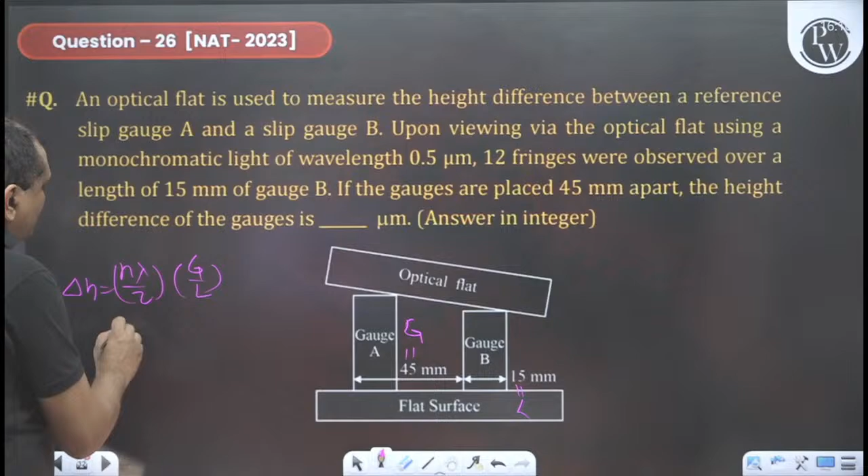My dear students, in this Abhyas I have given one very good question from this section that you may not have seen before. I don't want to give the hint here, otherwise you will tell me the answer. I have put a lot of energy into setting those 20 questions, so there is a very beautiful question based on this concept that I will discuss in Abhyas on the 11th. You will realize that all these questions are excellent.

Now, what about this? What about this? Remember that it's a MSQ. It's a MSQ.

Uranium-235. No, Sumit Babu, first of all you study, then we will discuss. Now, uranium-235. Whatever subject you are thoroughly strong in, those PYQs you should see once in January.

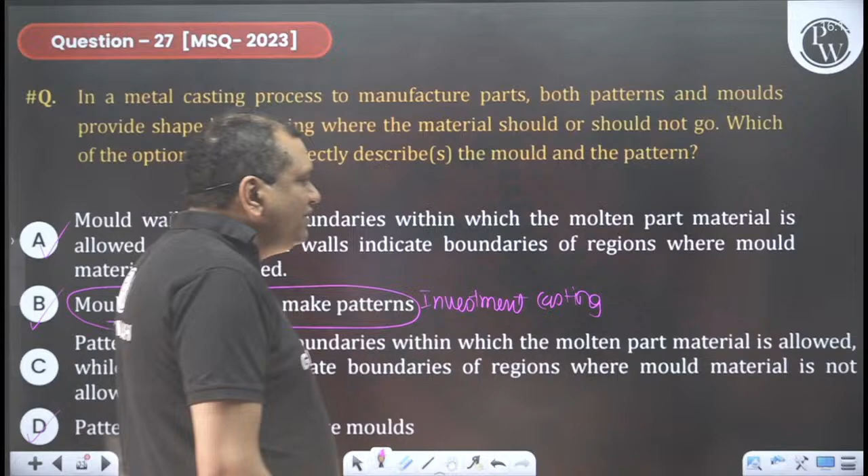Okay, C option is wrong. Pattern walls indicate boundaries within which the molten part material is allowed, while mold walls indicate the boundaries of the region where mold material is not allowed. Actually, this question is basically related, but A, B, D are the 100% correct options. For investment casting, the way we do it, there is a die, there is a mold, so we inject wax to produce the pattern for investment casting. B is 100% correct.

What about this? Now coming to casting. Read it.

Cast product of a particular material has dimensions of length, width, and thickness. The total solidification time for the cast product is 2 minutes. So T is nothing but K, volume by surface area square. So 2 equals K, volume is 75 into 125 into 20, divided by 2 into 75 into 125 plus 125 into 20 plus 20 into 75, square. You will get the value of K from here, and the value of K will be in minutes per millimeter square.

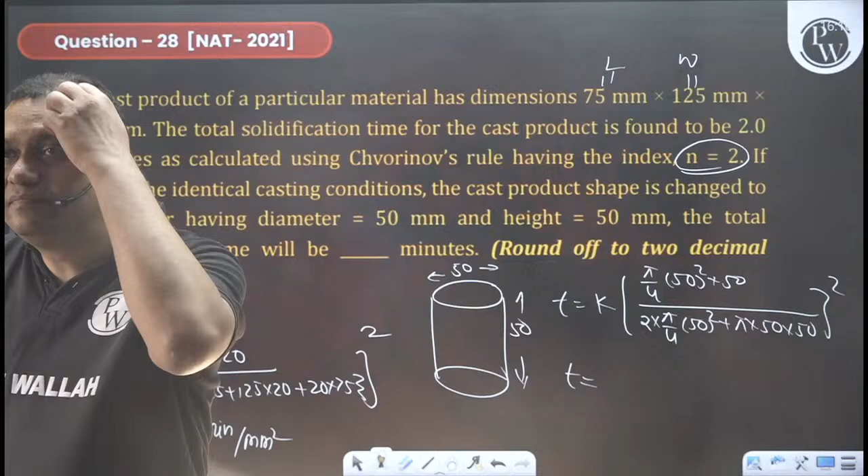For making investment casting pattern, we are injecting wax into a die mold. Then we are attaching different patterns, we get a pattern tree. Then we are preparing a mold again out of sand over this pattern tree. But this pattern was created by using some other mold, correct? Rathi and Shivang.

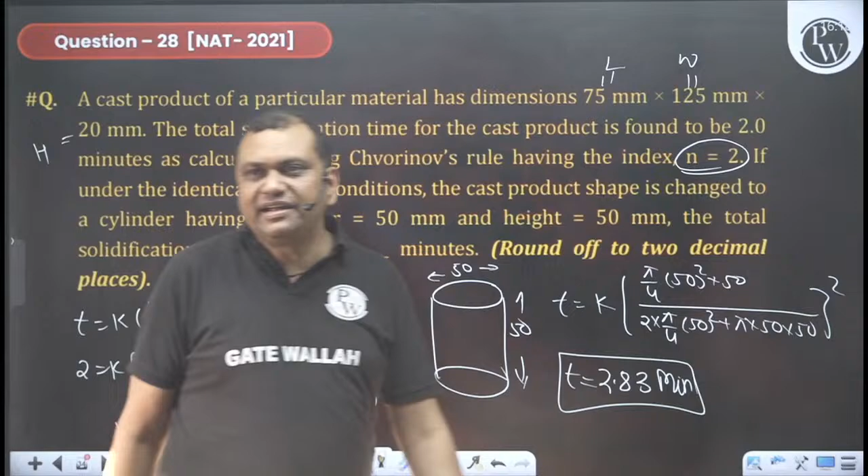Okay, uranium, response I got. This I will do, 10th philosophy. Acha, big M, okay, all right. I'm basically reading so that you know. All right, that's there in my mind, okay good. XYZ, what is your name, XYZ? Yeah, 2.83 is the answer for this, 2.83 minute is the answer. You are correct. Okay, all right. But Chandru, this will be difficult actually for Maha revision to add this one, but I will try to incorporate that. I'm just registering that one.

Okay, Sumit. Yes. Sumit, you are adding the whole syllabus actually. Okay, now give me the answer for this. 2 minutes, 2 minutes answer should come.

Vignesh, that is the reason I'm telling. Sumit, you copy the syllabus and paste it here. No, the Akash code I will take care of 100%, I will go deep into it, very deep. I will start with queuing, then inventory, then project management, then other things. Akash, I will take care of that. If there are any other things, let me know in the chat box.

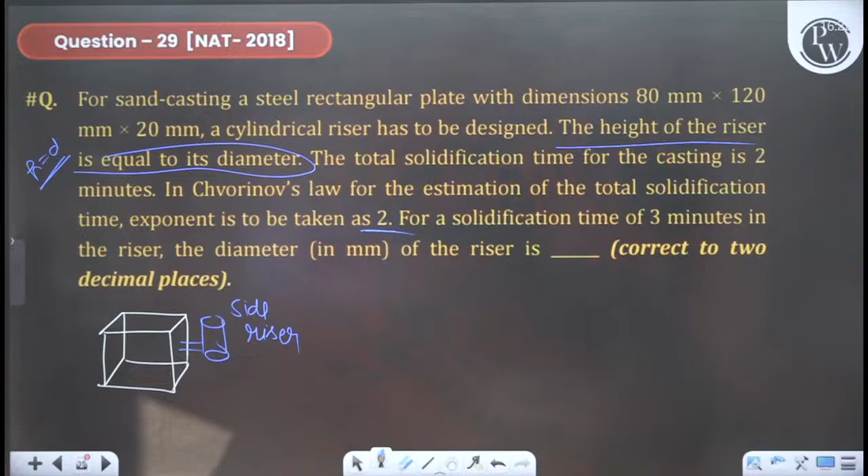If the Chvorinov's law for estimation of total solidification time has exponent taken as 2, solidification time is 3 times for the riser, 3 minutes for the riser, the diameter of the riser is... Here the solidification time is 2 minutes for the casting, and 3 minutes for the riser. So, casting to riser: volume by surface area of casting squared equals volume by surface area of riser squared. Height is equal to diameter, you will calculate the diameter.

Only 2 answers I can see in the chat box. Remaining students, try to give me at least a few more. This casting is pretty easy.

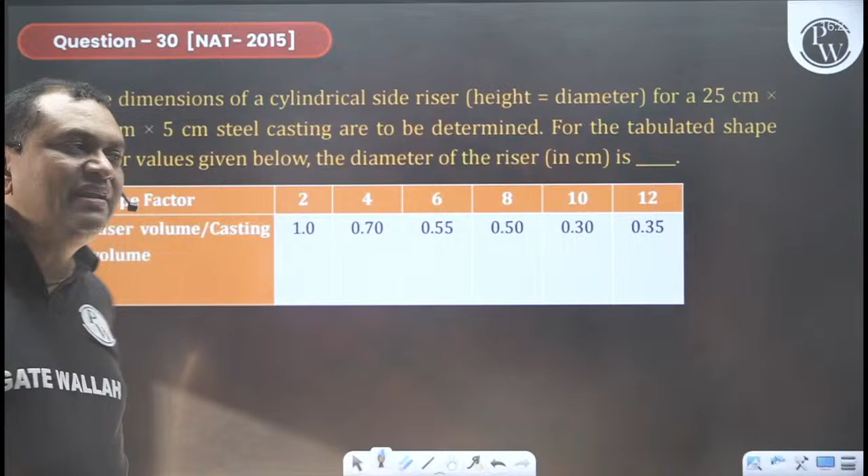Riser volume to casting volume ratio is 0.5. Casting volume you can calculate as 25 into 15 into 5 centimeter cube, and the riser volume, with height equals diameter, is pi by 4 D cube. Correct? Pi by 4 D squared into H, where H equals D. So find out the diameter. Yeah, good, 10.6, 10.6.

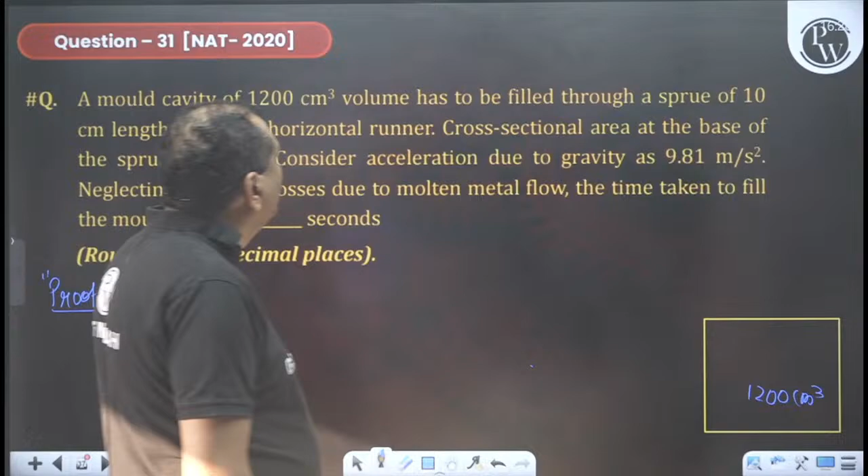A mold cavity of 1200 centimeter cube has to be filled through a sprue of 10 centimeter length. This is the gate area, consider acceleration due to gravity as g. Neglecting friction losses due to molten metal flow, find the time taken to fill the mold cavity. Now we have to find out, like this, this is 10. This gate area is given as Ag, 2 centimeter square.

Now you have to find out the time. Vg is nothing but under root of 2gh, this is ht, so this is the velocity coming through the gate, and Ag times Vg times Tf is nothing but 1200 centimeter cube. So you can find out the Tf. Yeah, 4.28 seconds.

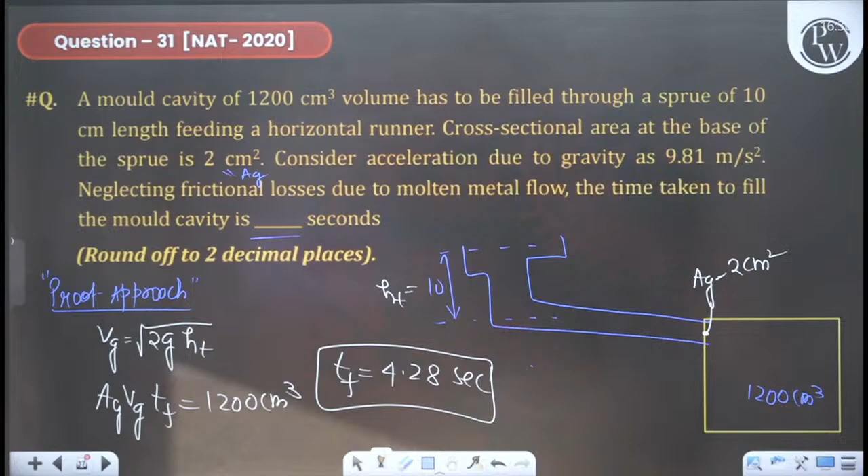These questions are easy actually, these questions are easy. Mechanical Rockstar, note that a long answer is not advisable.

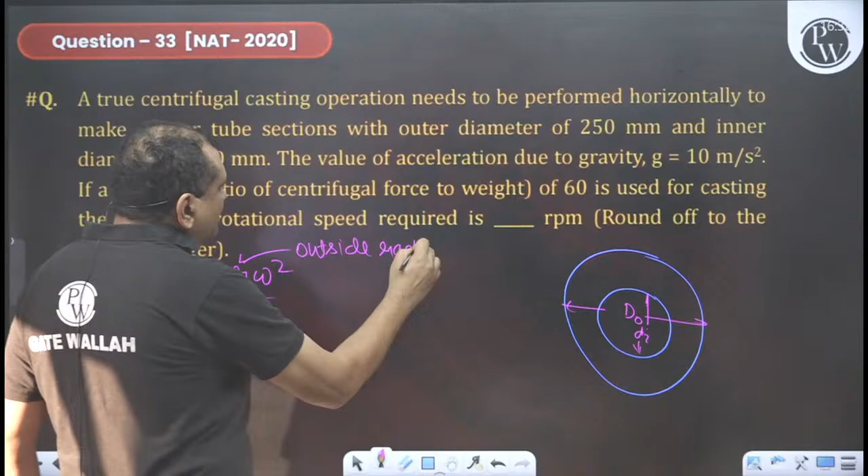D naught by 2, it is not mean. In one of the Indian author's books, he mentions mean. But this question appeared in GATE 2 times, and our IIT answer is matching only when you take the outside diameter. IIT answer will match only when you take the outside diameter.

Calculation should be fast, don't be lazy. That I have mucked up the answer. This is the answer. This is the answer, not that way. Not that way.

What is the RPM? 662, correct. This is 2020.

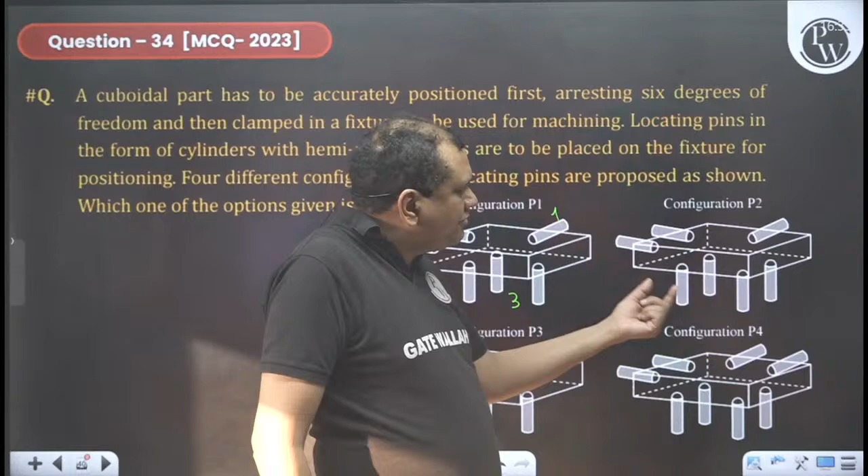Now, in this configuration P2, in place of 3, there are 4 pins. These 4 pins will define multiple planes. Because when the workpiece is placed in the jig, resting on the 3 pins, it will define a single plane. This ensures that machining is taking place in a single plane of reference.

The moment there is a 4th pin, it means there is a multiple plane, and there will be redundancy. So this is called over constraint. Over constraint on this plane. This is also over constraint on this plane and this plane, over constraint on this plane and this plane. And here this is correct, this is correct.

Here one more pin should be there. This is under constraint. Under constraint means some pin is missing. Over constraint means there is one additional pin, and due to over constraint there will be redundancy. What is the meaning of redundancy? We are not sure that machining is taking place in which plane.

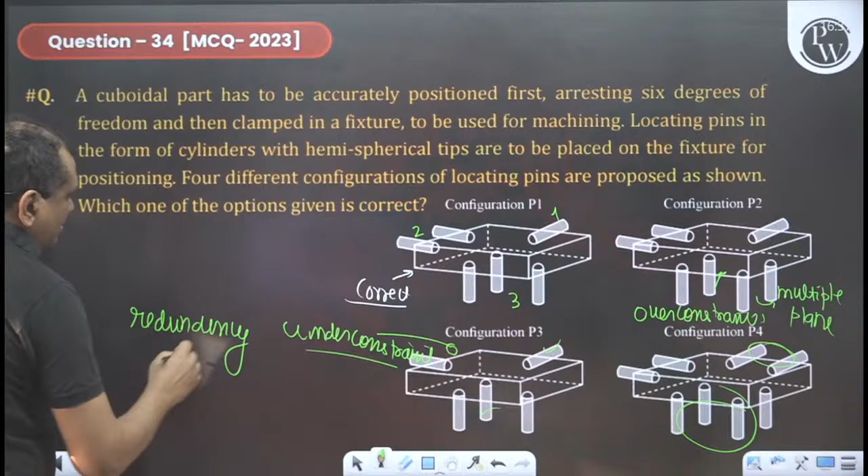Now, what is the meaning of under constraint? Oh sorry, I have written over constraint. Under constraint means required degrees of freedom are not arrested. Required degrees of freedom are not arrested.

Tell me, are all of you okay with that? Can you tell me in the chat box whether under constraint or over constraint, whether you have understood or not? Please tell me in the chat box whether you have understood.

Under constraint means required number of degrees of freedom are not arrested. And over constraint means there is a redundancy. There is a redundancy. Very good, very good, very good.

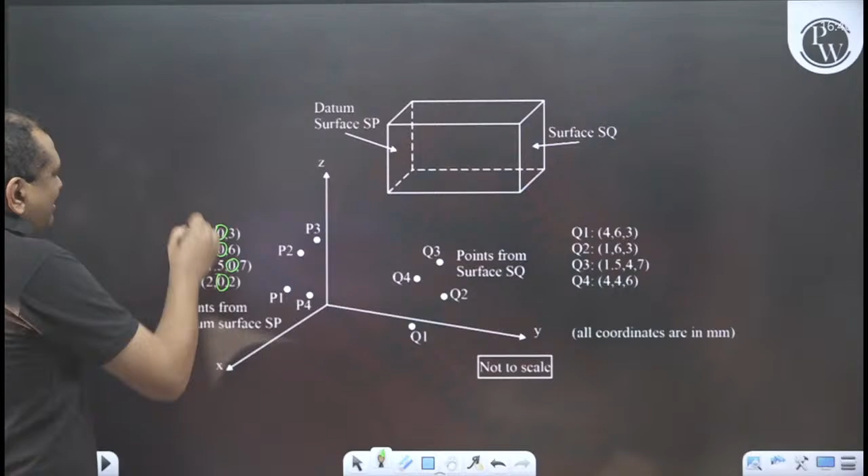The distance between the two fitted planes. Distance between the two fitted planes. So here on this plane, see, the Y element is 0. Y element is 0 means it's the XZ plane. Over the XZ plane, the Y element will be 0.

So the distance will be the average of these: 6 plus 6 plus 4 plus 4, divided by 4. Because in the first plane the Y element is 0, it means it's the XZ plane. So on the second surface, the Y element, if you take the average, that is the answer.

Yeah, but it was given in CNC, so that's the reason. Array, what is this? Ah, this is the schedule.